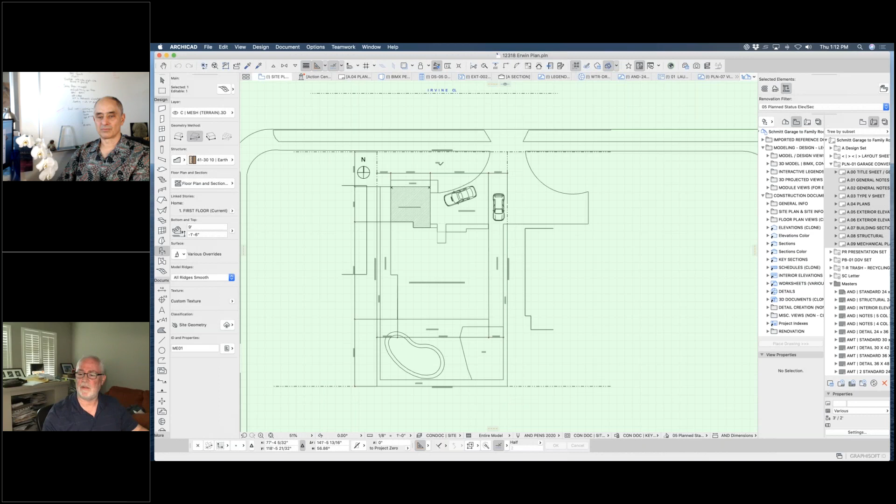So I break this down. I've got my construction documents, and this is really, I think, minorly changed from Eric's template. I've added a few more elevations and sections and things, but it just zips through real fast. I come in and do a quick demolition, and then I lay in the floor plan. While I'm doing all of this, it's creating the sheets.

So I've got a title sheet that has views in it. They're empty when I start. It has the place for the site plan. Obviously, depending on your site, this sheet may change. This particular one was small enough that, because I was going to be doing Title 24 calcs, I put in all the existing glazing. Again, that's just taken right off of the model.

I actually, for my maps, go straight to Google Maps. I find the address, do a screenshot, and drag it right into here. I also start with some worksheets, and every job starts with me dragging in either this particular one straight from ZIMAS, the LA City site, their plan, or I brought in the aerial view from Google Maps, which helped me lay things out. It's not that I then go back and measure to check things out as far as the site, but it's a great way to get ahead.

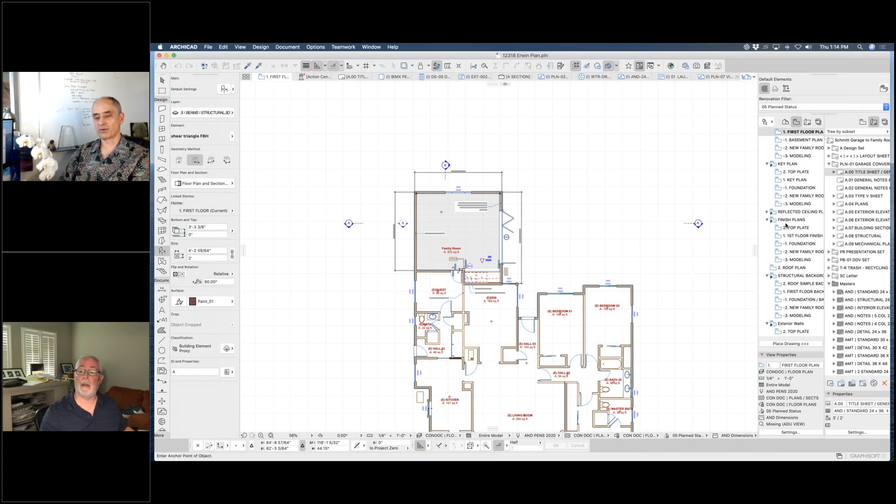Go ahead and bring up that 3D view. That would be nice, just to see it in the context that you... Let's go to model. I'll just pull any 3D view up and we'll just zip over there. That's inside.

So that is, if I zoom up, that's Google Maps. And this is stitched right onto a mesh and scaled in. And it was great. I did it after the fact, and I was pretty darn close with laying out the site.

This doesn't have to be a perfect model throughout because I'm literally just dealing with this space right here, right? So they care about, can they get their drums in there? Can they get their laundry in there? What's the lighting like? Things like that.

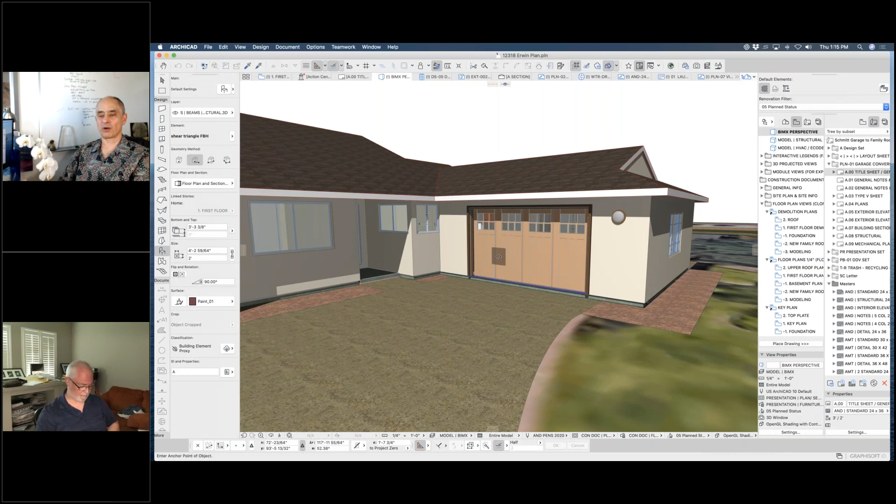Anything else you want to see on this, Eric, before I go back? We'll just take a real high aerial view because right now it doesn't communicate very well, but I imagine if you're taking a top-down view or a very high-angled view, it would sort of look like the building in context. Yeah, when you get all the way up, it does, especially if I got all the way over it.

There you go, we can have the street the right width. So the laser tape works. There's the context of the building within the neighbors. That makes sense? Yep, absolutely. So now it actually seems like it's usable.

Okay, yeah, do go on with the file structure. Now, you used to start with a little building off to the side and eyedrop things and copy and paste them. I know in MasterTemplate we have a somewhat different approach, but it's based on that. Are you using the MasterTemplate interactive legends, or use a template? Absolutely.

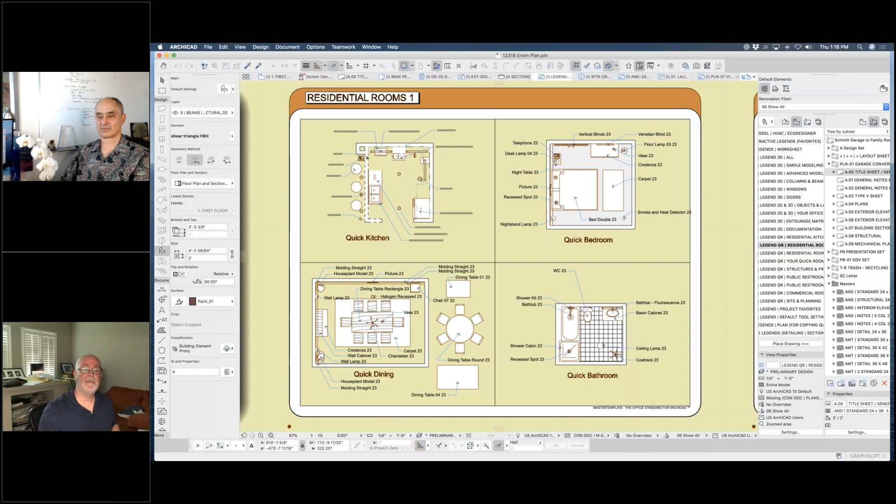So I use this a lot, and I live in this zone here, residential rooms. That's interesting, some of the stuff is missing. I do a lot of option-clicking off of these and dragging things in.

Instead of using that, I have some walls I use all the time, so I'll actually start putting a wall in and then pick the composite that I want. I get really specific with these because especially nowadays, we're really tightening up these buildings energy-wise. We're getting into these details with new assemblies, with the zip system or with exterior insulation, and the builders are having a nightmare right now.

They keep telling me, 'What is this? I've been doing this for 40 years. I've never had to do this.'

You showed me an interesting 3D cutaway when we were meeting just ahead of this session. That's in this project right here, the little ADU. Those cutaways, let me find my 3D views. There we go. So standard 3D views, I do things like having the front porch, or in this case, views that I used to show them.

I used to do renderings all the time. I show them these because this much is done in a day or two, and I don't even put them in sketch format. I don't want them thinking it's too easy.

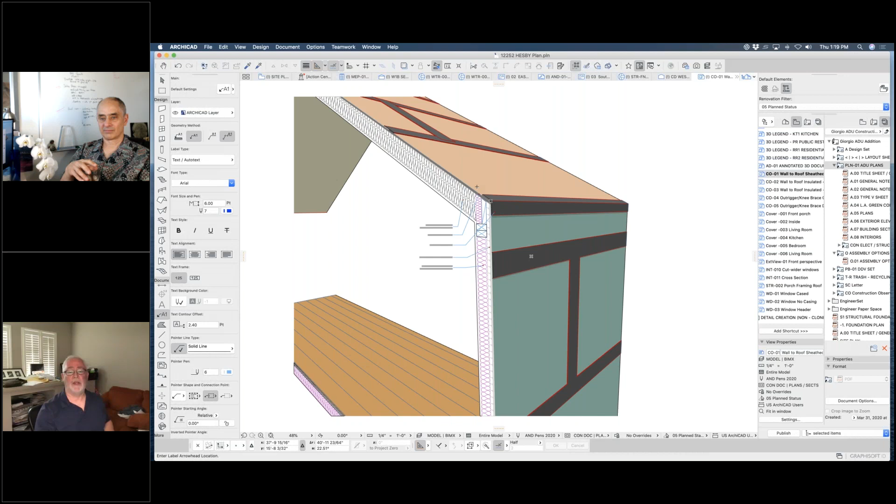So I created 3D details for him. This is the zip sheeting on the roof, the zip sheeting on the wall, which has the insulation as part of it. We showed the tape, and zeroed in so he could see how I want this to run all the way up through the blocking and keep the envelope sealed.

And then I stepped him through it. I then added wood for the rain screen. Then we added the roof and added on the eave as a boxed-in eave, so that the insulation went right through.

I will tell you this, he still came back to me and said, 'I need more information. I don't understand what that is.' We blew up the detail for an outrigger and how I wanted it built, all in 3D.

We're doing a lot of this now, and it's based upon the model. In this particular case, because I wanted to be able to blow it up and show different stages of it, I actually pulled a copy of the model to the side and worked over here on those.

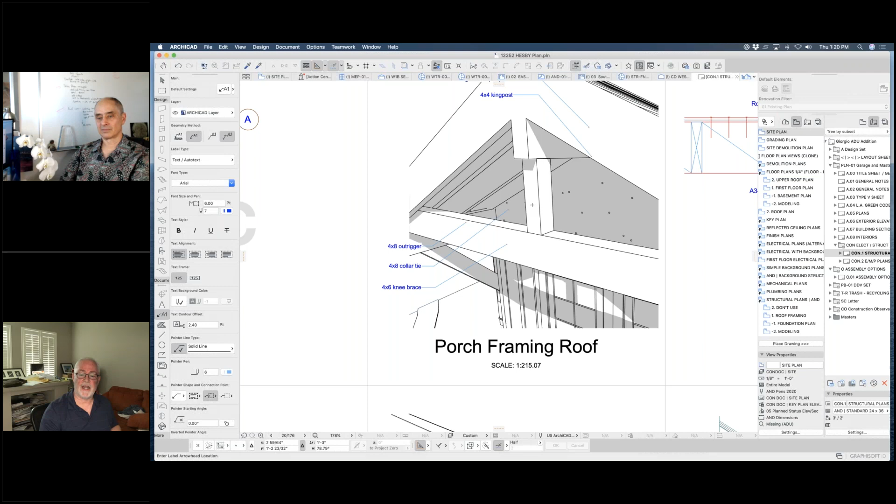That's how we're using 3D to get details across, and they are in the plans, in the structural set. So you have your regular plans with framing plan, foundation plan, details of eaves, shear transfer, and footings. And then I blow up details that I want him to understand in 3D because they just are not getting it in 2D, and that's fine.

It's a constant battle to learn what language you need to speak, depending on what builder you're working with or who the owner is. This one works for most people. He was still struggling with this, so I haven't figured this one out.

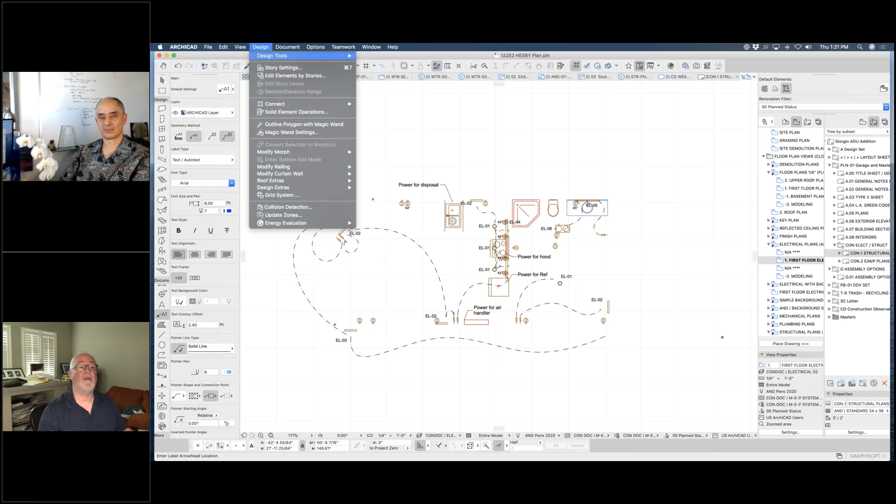I had not spent enough time on graphic overrides. And I finally figured—I know, the guy really knows this stuff real well—but I hadn't spent enough time on graphic overrides. I finally started realizing I had to change the way the walls looked, because I work with composites where you can see the whole assembly, so I changed it for these now.

So when you look at these over here, these are all actually two drawings, right? There's a background and then there's the mechanical laid over it, or the electrical laid over it. Let me stop just to explain for those people who might miss your quick explanation.

So graphic overrides are a way, introduced in ArchiCAD 21 I believe, to change the way things look. They override the graphics. So in this case, making the walls have just a single fill, a poché, a light shade, as opposed to all the detail that would be in the main floor plan and, of course, the sections, etc.

So that's one thing. Now you also used a feature here on the sheet - we're zoomed in on a layout sheet, and you've got two different drawings placed in that area. Sometimes that's useful. I'm not sure in this case whether you could have done it all in one drawing, but the point is, you had one drawing with a particular graphic override and another drawing isolated with different settings. So that is one way to do that.

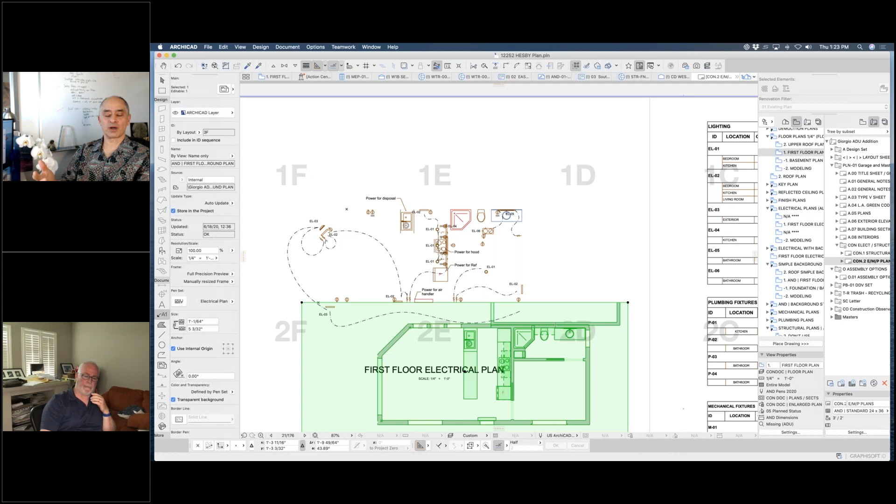Can you just select each of the drawings so we see, and I'll explain my thinking behind the fact that there's two of them. So this is the actual - if I move this - that's the electrical plan. And then this, which has no title on it, is the background. Hold on, there are two drawings there, but only one has a title. So from a printed perspective, it just appears to be one drawing, but there are actually two views, each placed and synchronized, just placed so that they match exactly where they should align.

Yes, and the reason I went to two - you could do this another way - is because I don't want to do anything more than once. So I've got my walls done the way I want them with the pens I want, which I've lightened up recently. All these layers that go to these walls - vapor protection, water protection, air protection, thermal protection, and structural protection - take up a lot of space in a composite and they're hard to read. So I've gone thinner, but it also means they're busier.

And this way I can take that exact drawing in a different view over here, and give it different graphic overrides as well as different document settings. So it's the exact same drawing - I'm not drawing anything twice, I just have a different view of it.

Okay, so that is something I might explore with you, Van, because sometimes it is required to have two different drawings, but other times you can use a graphic override and just select, for example, that you want to work on walls that are on particular layers. That's one particular override, and it doesn't affect anything else in the drawing. Sometimes you can combine these, but you've got an efficient system there - it's literally just placing two drawings on top of each other, setting one of them to not have a title, and using the view settings for each one.

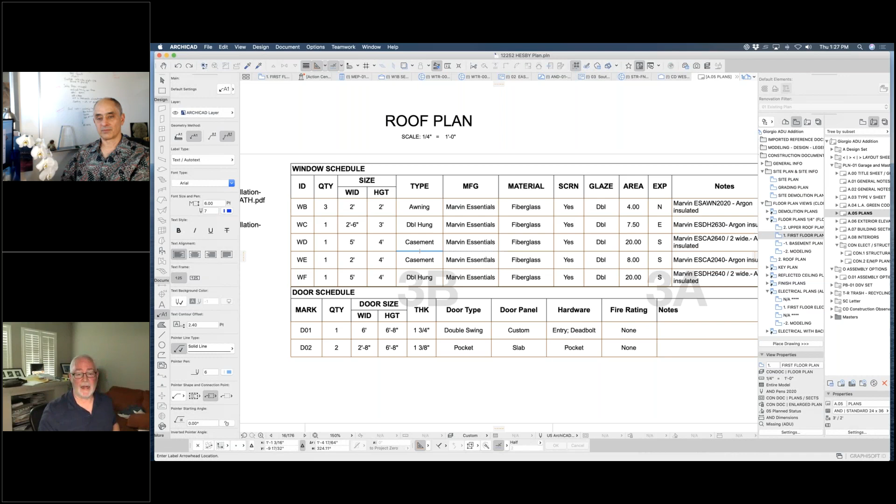So I did that for a few reasons, but everything is in one place now. So if I go here, I can go down to properties on this window, and I can go to schedules. I know that if I'm working in a larger office I would have to make this more automatic, but I can then go in and put in the information I need - there's where I have the exposure, the manufacturer, the glazing, everything is here.

And yeah, so just another clarification, since I like teaching while we do these interviews.

Graphisoft has provided for decades the ability to do schedules with data built into the library parts. In recent years, with the properties capability, you can now customize your own data fields to put into schedules. Using properties, you can reorganize the ones in that area Van was showing, add your own properties, and not worry at all about the library part definitions. So if you create your own custom window, you can easily have that same information go into the schedule. That's under the property manager.

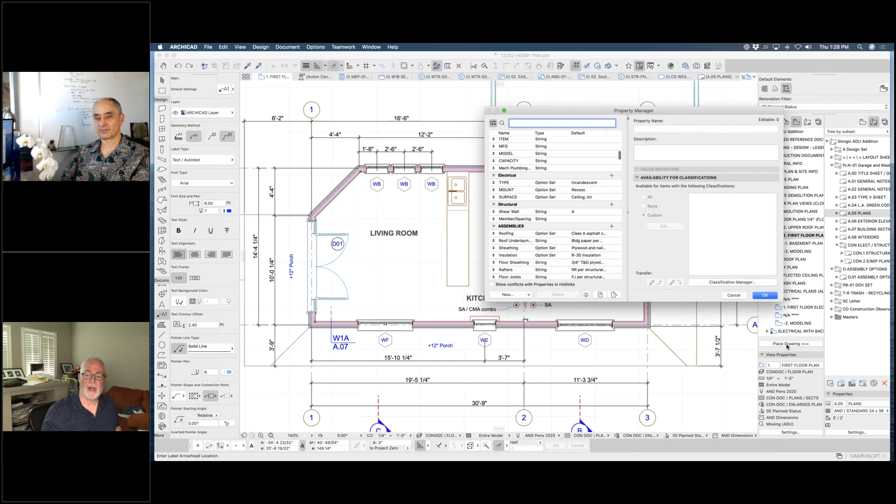Yes, right here's the property manager. That's exactly the biggest reason—I don't have to have a certain window or door or light fixture.

Brett thanked me for asking you to expand on that. So that's great, all right.

So let's carry on. When you start a project, typically you're doing remodels or additions these days, so you go and do a site survey. You said you were using a tool that brought back a DWG file to the office. Is this like an iPad tool that allows you to quickly get the basic data? iPad or iPhone—it's an app called Magic Plan. And it will communicate with certain distometers.

This is not the one that works with it. As you measure or put the measurement into the room, the newer versions with the newer iPad Pro, which has a LiDAR sensor, are much better at actually getting the dimensions right on their own. You get the corners of the room, say you're done, and it says tilt up to show the height of the room, then point to the windows and doors. It does all that remarkably accurately—accurate enough if I'm measuring an entire house but only working on two rooms of it. I'll still measure by hand everything I'm going to be touching, because they say if it's off by two inches, it does matter.

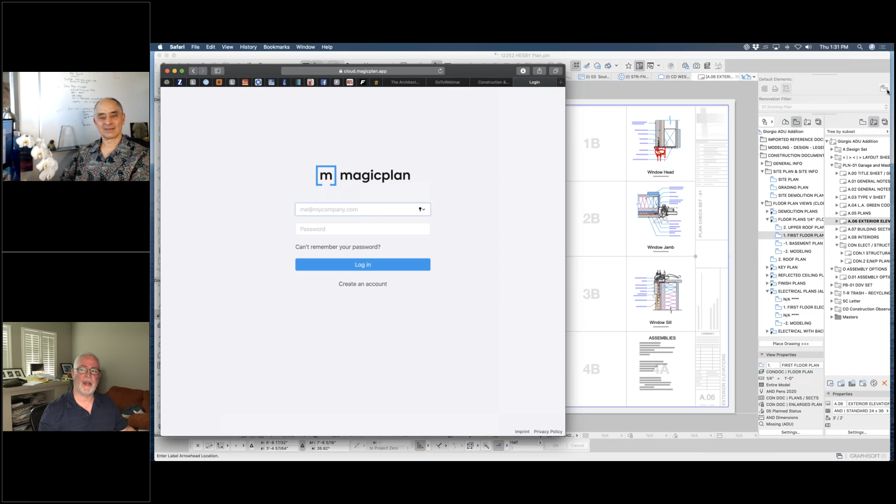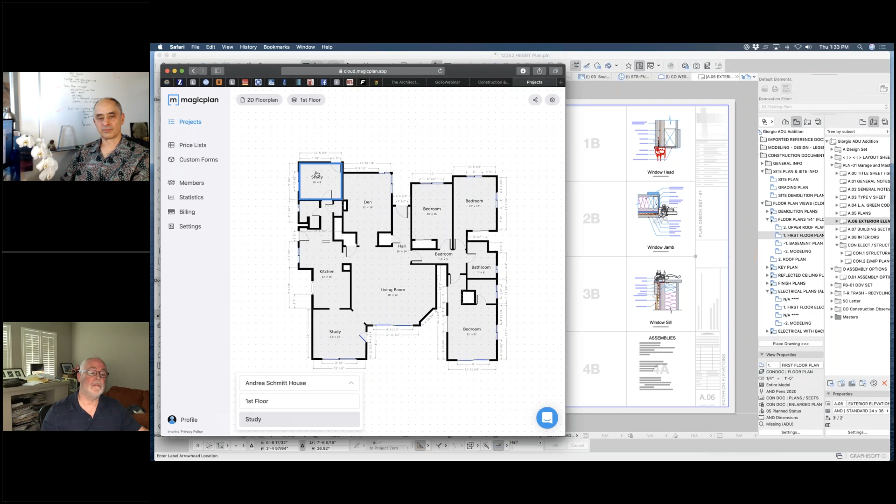So these are all individual rooms, right? And for any one of these, it should allow me — there it is. If I took any pictures of anything in that room, there it is, as well as any notes. So this document that came up, that's great.

Hang on. Internet's not being nice.

The plan that came up also comes to me as a DWG. So I pull that onto a worksheet and work right off of it. But it's actually a 3D model — you can look at this in 3D and spin it around. For some reason it's not happy, I don't know if my network is slowed down. Anyway, keep going. Okay, all right.

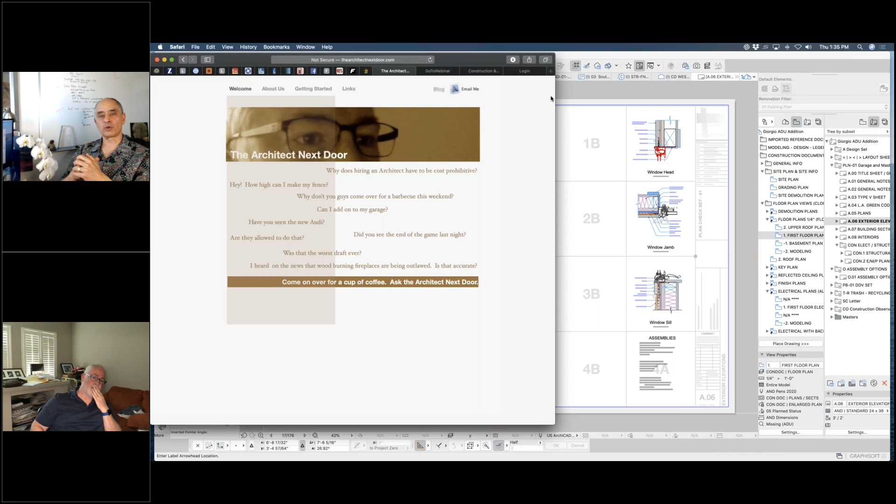Well, you showed us enough to whet my appetite and make me curious about it. So you bring that in, and then you use your kit of parts, nowadays MasterTemplate, to quickly build up a model. At what point do you start adding in all the detail, like the 3D cutaway you showed? Is that something you wait and only do in areas you need to, or are you working with composites and complex profiles pretty quickly?

I work in composites and complex profiles right away because it helps me see it as something real. There are times, like a plan I was working on for my own house, where I did a lot with just solid walls because I didn't want to start thinking about details like nailing, flashing, stucco, etc. I wanted to think about the abstract of the space, but I do work in those pretty quickly.

I also work in 3D right away — most of what I send to clients is either movies, 3D renderings, or 3D sketches, because none of them, and I mean none of them, really understand 3D from a 2D drawing.

Now you were mentioning sharing movies — do you have any samples? Movies don't tend to show up very smoothly on a webinar, but we do get glimpses of still shots along the way. No, I have still shots. The movies — that was why I signed up for the VR class, which I didn't have time to do.

Early movies were just too jumpy for me, so most of what I do is 3D views — either fully rendered or a lot of work with those 3D documents. You showed us the 3D documents, at least a few of them. Can you show us some of the views that are a bit more rendered up to this point?

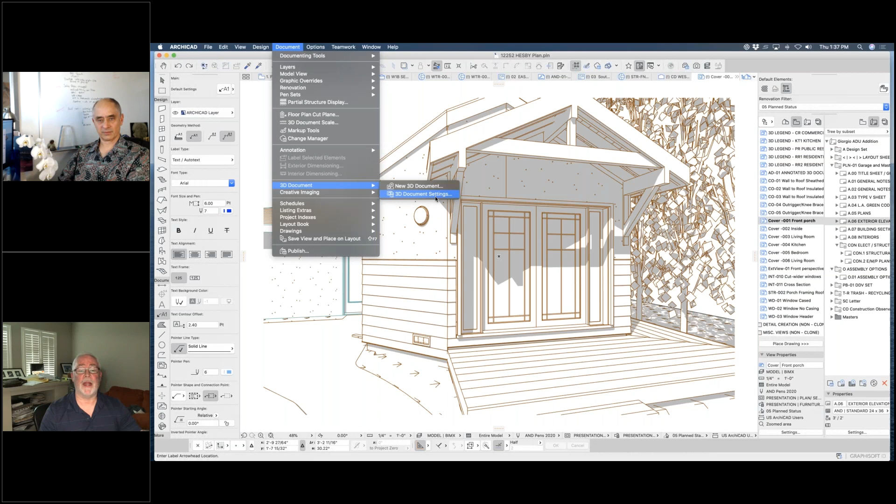What's interesting about these is they're all 3D views — that's why I like them. You can take any one of these and... where is it? In 3D, you know where it is. Are you talking about rendering it? No, I wouldn't go for rendering it. I could go to these and just change the settings, and I tend to do that, but usually I have more than one where you could just say, no, I want it to have its own color, its own surface, usually not shaded, and then boom, you've got color.

These tend to be so cartoonish, but the clients seem to like it — even though the stuff we've always wanted to do as architects is make it very photorealistic.

What happens, I find particularly in design, is that when I get too realistic, even with color, they start thinking about the finishes long before they should be. They'll look at siding and ask if it comes with a little more yellow in that brown, and I'm like, wait, let's not talk about that yet. So I stay away from a lot of the photorealistic stuff up front. I deal a lot with these types of views, or a quick photo.

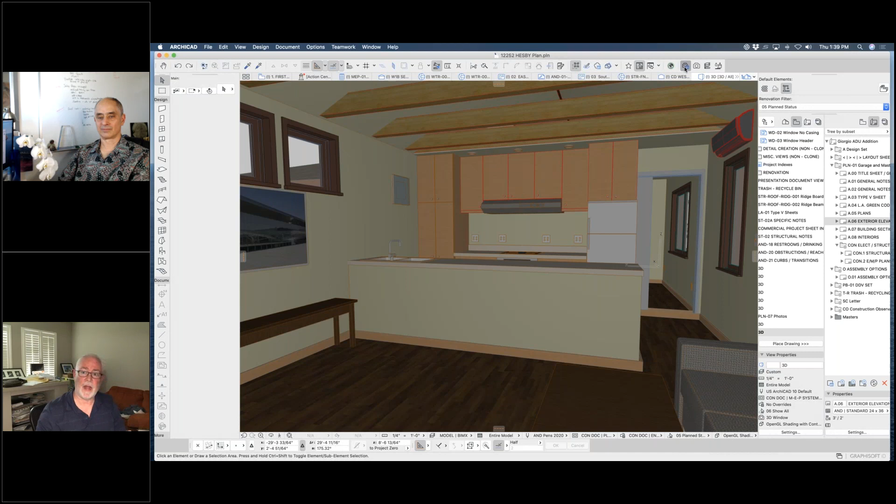The other thing I do quite a bit of is I will very quickly jump to the right settings, go to 3D. Oh, look, we lost a seat. Things go wrong, and now that I'm working on my own, not with a full office, I can very quickly fix something like that. And then you get a 3D view. The idea is this thing is well enough, accurately enough modeled, that I can literally show them anything I need to. Oh, I forgot to turn the lights on. But you get the idea of what I'm saying.

Now you said that you had these two small projects that were a little bit more developed in terms of the working drawings, but you had the other larger project that you were in process on, but would be more interesting architecturally.

Yeah, so that's this project. This is a house that we're doing in Studio City on a street called Valley Heart. It's definitely larger, it's a corner property, a large piece of property, a 2.5 size lot. So we did a lot of work laying it out and deciding where we wanted to look. Across the street is the river, and the whole lot is surrounded by trees.

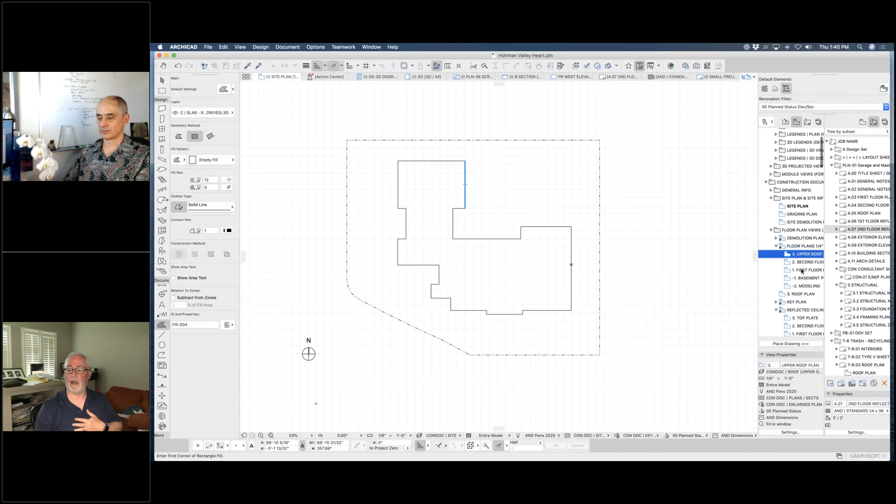So in working with my wife, and talking about it since we're not the client, we discussed how to break the house up. We kind of wanted a wing for the kids. I have two kids, one is 20 and one is 16, they're both musicians, and they're both very loud, which is wonderful. I love music, I love hearing it, unless I'm trying to think about what I'm doing right now. And we wanted our area to be separate.

We're not through design development almost, but you can see, I don't need to walk you through the whole house, but it's broken up. You enter on a corner, you have your public area, and it gets more private where my office will be. Then when you go upstairs, you have our area and the kids' area over here, with a break in the middle.

I'm playing with finishes and massing and volume right now, so I do a lot of this. There we go, let me get back outside. This is really how I do a lot of my design work. I start looking at something from down here, I move up and look around, and say, well, you know what, I really think this here should be this material. You know, no, I want to go back. I do a lot of that.

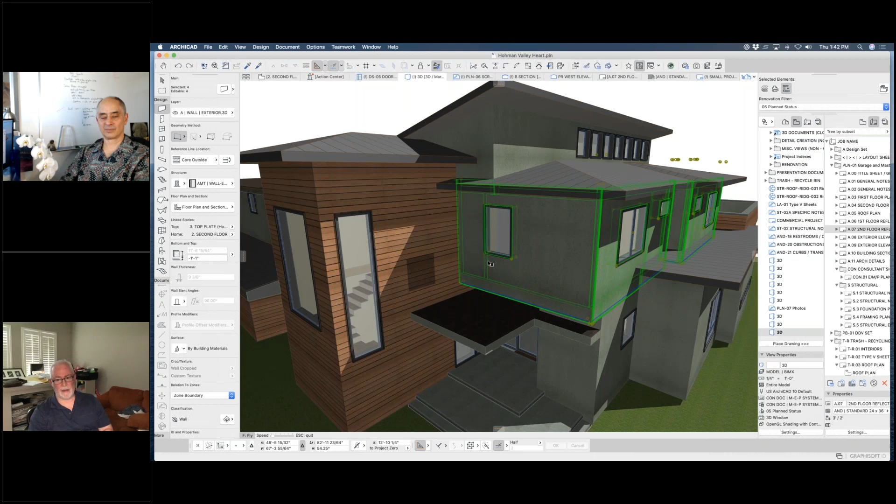I'm right now playing with this roof height because I want to bring light into a hallway. And believe it or not, this is design development. It looks like construction documents because I was trying to figure out dimensions.

But I do model this much as I go. I think about things like, when I cut a section, let me grab another section, hang on one second. And I've got my floor framing. I also want to look at the floor framing of a deck or a patio or a balcony or something, and I don't think I have one that shows that right now, I haven't worked on it. Let's see, there we go. So I'll work on laying them out on this, and I look at things.

Can you zoom in on the wall section that's sort of in the middle area? Yeah, here? Yeah, so I just want to see how far you've modeled up to this point, between one wall and the slab and the next.

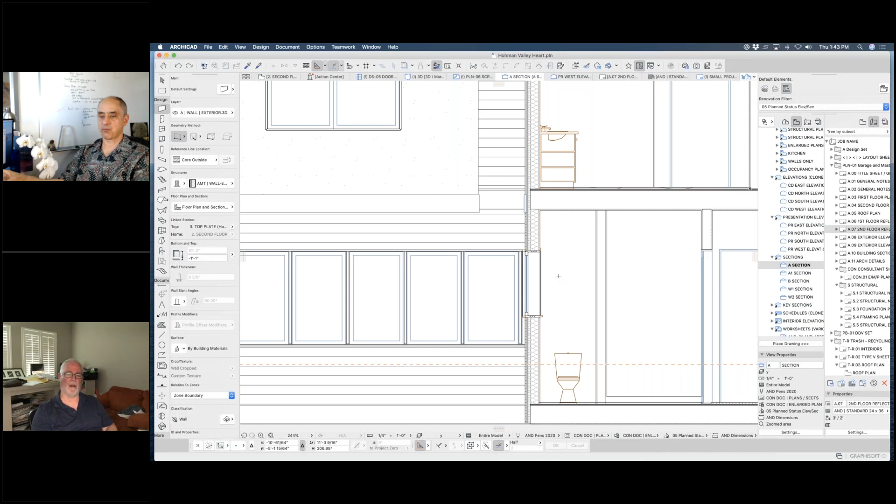So you don't have any framing, you're not doing complex profiles, but you are having all of the skins intersect. Yeah, this is part of me being a hybrid. All the skins are there, they're accurate. I tend to, particularly at this point, if I had to do a section and show it, I would quickly throw on the 2D bits from your template. So I throw in the double top plate, the sill plate.

I need to work on learning more about complex profiles that are stretchable and scalable in multiple directions, so that I could really have a good wall where I could slide headers up and down or double sill plates up and down. But this is the level of complexity right now.

If you zoom in on this, there's a difference in the walls. This is wood siding with a rain screen, then zip, then the 2x6, and then insulation.

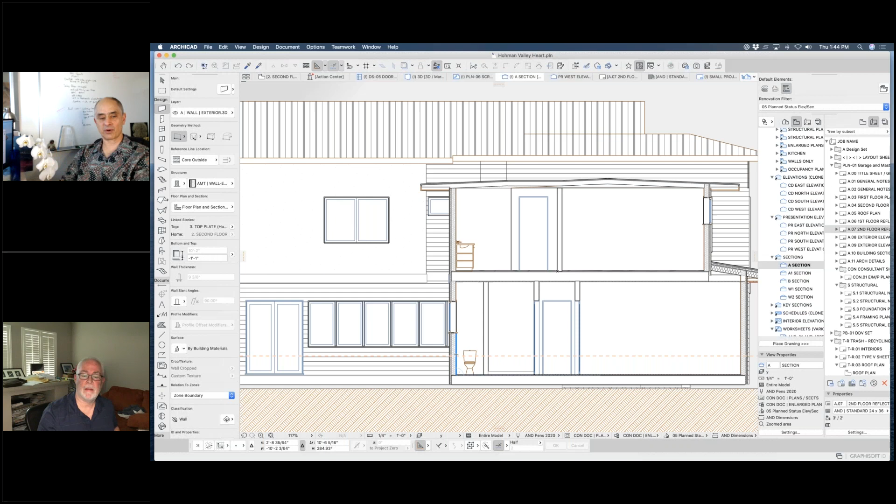Then up here it's stucco with a rain screen. And the floors right now, I'm actually laying in the flooring on top of the floors because it changes so much—again, that's from your template also. So you have a structural floor with the sheathing, and then on top of it tile or carpet or whatever, like that right there. That's a separate finished floor slab laid on top of the flooring.

So this is design development right now. But even at design development, this is the beauty of the system—the sheets are starting, right? The notes, everyone has their own notes, but the sheets are starting to fill out as I work, even getting into reflected ceiling with different graphic overrides.

Exterior elevations, right? Oh, this is interesting—just pause for a moment. So in order to really highlight the different planes, here you're putting a fill with a wash behind it.

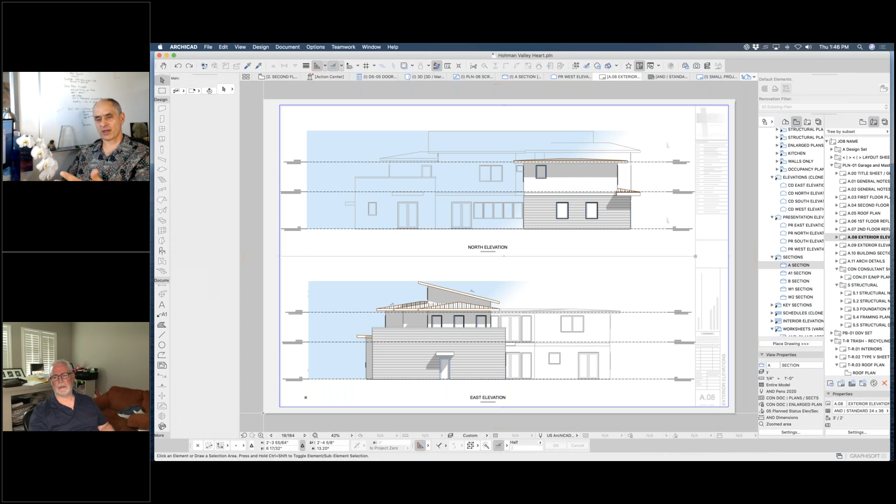Yeah, that's because it is one thing to just have certain vectorial hatching, like the upper one—either one, you've got the siding showing, and then the walls behind that. We don't know if there's no siding, or if you've hidden it because it's in the distance. But by putting the wash behind that... are you doing that in the view, or on the layout sheet?

It's in the view. Okay, can you open up that view and let's see. It's literally a fill. All of my elevations and sections fill up the width of the page basically, so that I have room to put everything in there. Then I can drag this over and change the color, do whatever you want. But it gives you the feeling of what the foreground is and what I want you to look at with the rest in the background.

For those watching who are wondering how he does that—in the fill tool, you can put a variety of different options to cover an area. One option is a radial fill, another is a linear shading, and you can set it to be one color in one place and change to another color elsewhere. That little vector line, when he moves it, shows how it changes from the highest density of color to pure white or no fill. That's a very interesting way to highlight what you want to show on a particular drawing, and it's on a layer you just turn on and off.

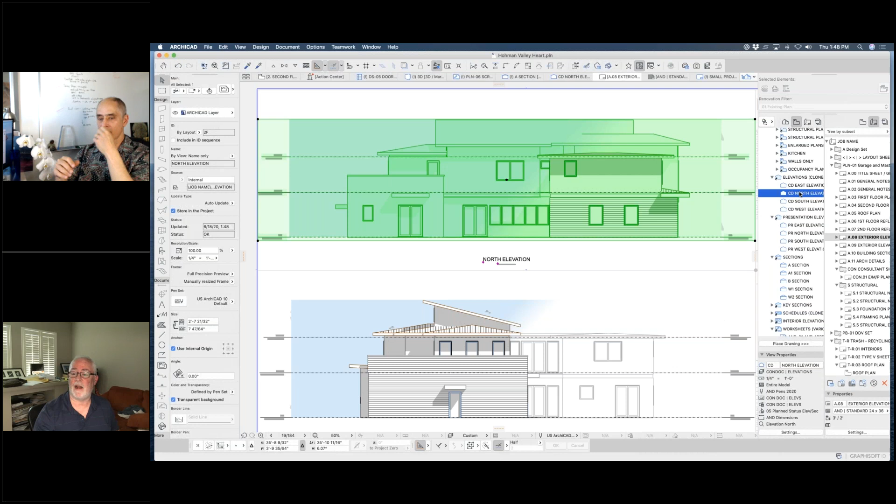They change. So let's take a look at that elevation. Here's the north elevation. I also present the elevations with color, right? They're the exact same marker, they just have different graphic overrides. Again, this lets the client start to get an idea—in this case, it was letting my wife start to get an idea for the different materials. The sky stays the same, but when I print it, the sky will go gray.

So that's this elevation here. I use the shadows also, and that helps us take this flat drawing and really punch it up so people see the depth. Okay, let's see if there are any questions or comments here.

So how do you output hard copy? That question is from Tom Markunis, from a few minutes ago. Do you print on large format plotters like has been traditional, or are you doing more small format things and digital?

I'm almost all digital, all PDFs. My print service, when I need drawings, whether to go over something with the client or for the city, what used to be blue printers just print them out for me quickly now. I'll also say I'm doing more BIMX models on the large iPad and sit with the client to walk through it, or I'll send them the BIMX file so they can walk through the house on their own and tap on plans to look at those. It's a lot of electronic and digital.

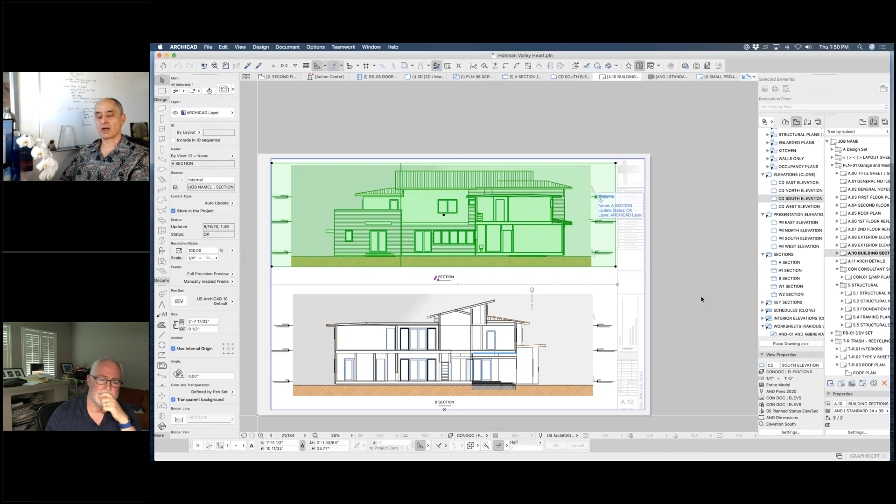So about the fill you put in, at first I thought it was cut out, at least in the ones with a more dramatic change, focusing the eye on one area. If you go back to one of the elevations, it looked like the blue was cut out around the foreground area, but actually I'm seeing now that you were doing it by changing the tonality in that area. So it's not precisely cut around, but you could have a fill that's literally cut. You can add more polygon points so the background is washed out but the other things come forward.

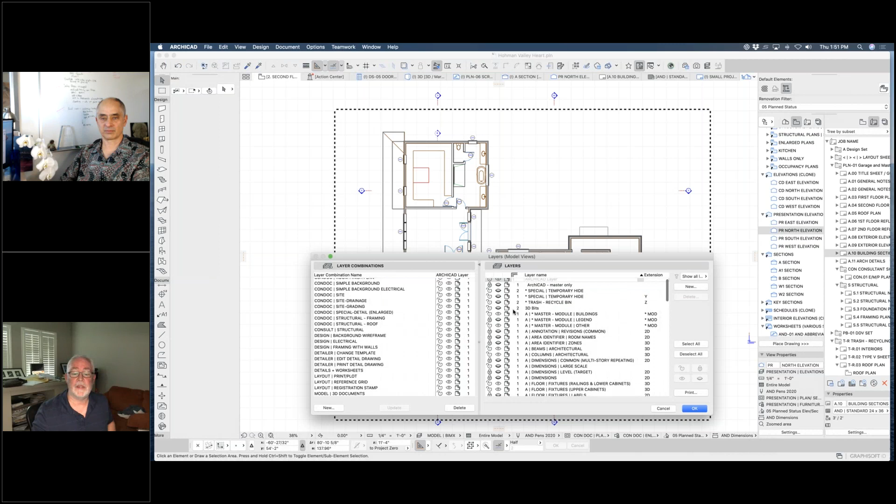There's another aspect to that too, I think, but let me check. When you go to the marker, let me turn the marker on—marker elevation—I'm prescribing where the mark distance is. So the question is, if I push that back further, will that change the appearance? It should, right? Should I explain mark distance?

Go ahead, I'll be interested in your perspective. On an elevation, when we drew by hand, things that were closer I profiled with fatter lines so they popped out, and you drew lighter lines as you went back. If you handed this to somebody without the shadows turned on, it's very hard to tell the depth of what you're looking at. You can tell this wall is in front of the green wall because it cuts off the door and steps out, but without these shadows it's very hard to tell.

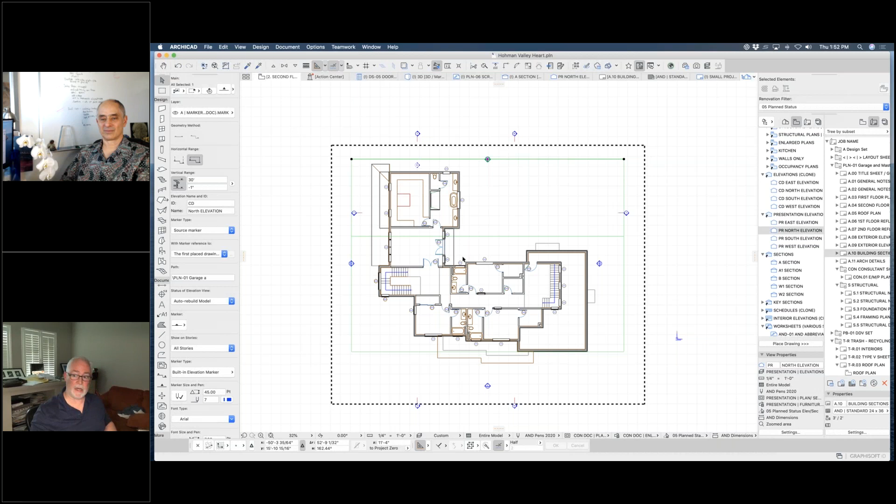So the mark depth—I'll go to the plan view to explain it. Here's my elevation marker, showing the entire building. This is the end of it. The mark depth lets me say anything beyond this point I can treat differently. I've pulled it back now, and that face that was brown should now be translucent or transparent. If I change that setting, I could fill all of that with white, and the blue would disappear behind it, or leave it transparent—that's the other trick.

So you can right click in empty space and choose elevation settings. By right clicking in the view and choosing elevation settings, we can see the setting on that marker, which might be the same for other markers, but the mark distant area is checked. Then there's the option that fills uncut surfaces in the distant area—filled with nothing, so that's translucent or transparent, showing that fill. The fill is literally behind everything.

But if I came in and filled it all with the screen, that should change it. Now that still gives you the mark distance—I can still tell that stuff is in the background and this part of the building is closer.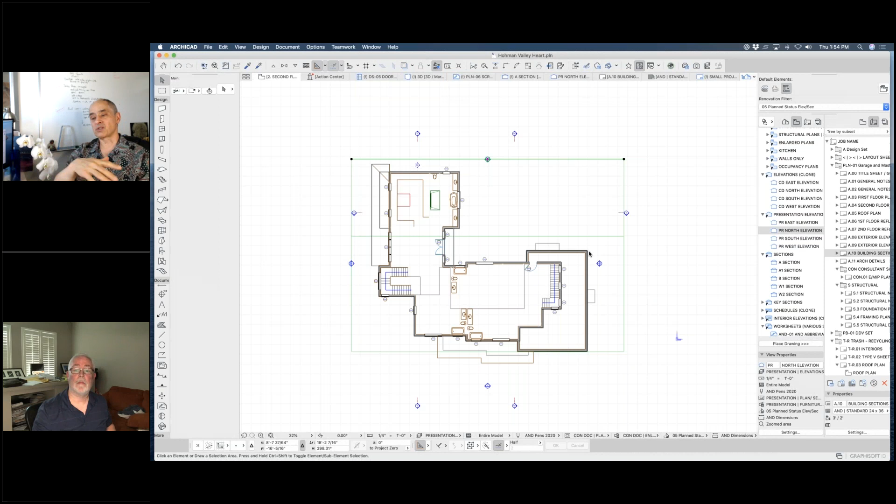Okay, yeah, that's excellent, and I think that clarifies it. So when you turn on mark distance with the checkbox, your marker on the plan gets an extra line you can adjust. If it's not turned on, that intermediate line isn't visible. The one limitation is it's just a straight line—you can't zigzag around things, so it's a little limited there. But actually, did they change it? Ah, okay, so that's something in recent versions they did change—you can zigzag it if that helps clarity.

Now, by the way, Steve Cribble makes a point that the gradient fill you used, which is great, requires using the fill tool. Can you just highlight the fill tool for a second on the side?

So when you select the fill tool, you have to deselect whatever's selected. There you go, in the fill pattern to the left of empty fill.

Press down there, so there are 4 choices for fills. The first one is graphic fill, meaning it's purely graphic, do whatever you want. The second one is a cover fill. The third one is a cut fill. And the fourth one is a building material.

These change what options are available, and the gradient fills that we were just looking at are only available in the graphic fill because they're purely graphic. They don't represent real materials.

So here they are right here. And what he's saying is that if we go over here to this, they shouldn't be there, right? Yeah, they're gone. Gradient fills are gone. Thank you for pointing that out.

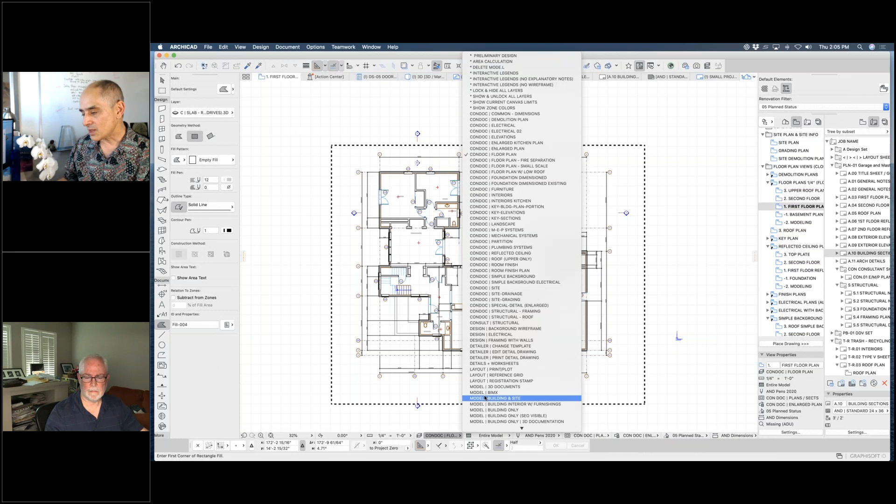Nathan asked if you could do something for the boxes really quickly. I'm not quite sure, but I think that was related to the fill.

Mark Wren asked, is the fill tied to the elevation marker? The fill is inside the elevation view, it's just drawn in there, not on the sheet. The ability to see through the background is based on the marked distance setting being turned on, with the option for making distant elements just line work and nothing opaque, which is what Van was using.

Nathan asked, do you always work with true line weight off? No, I go back and forth. In fact, right now it isn't on.

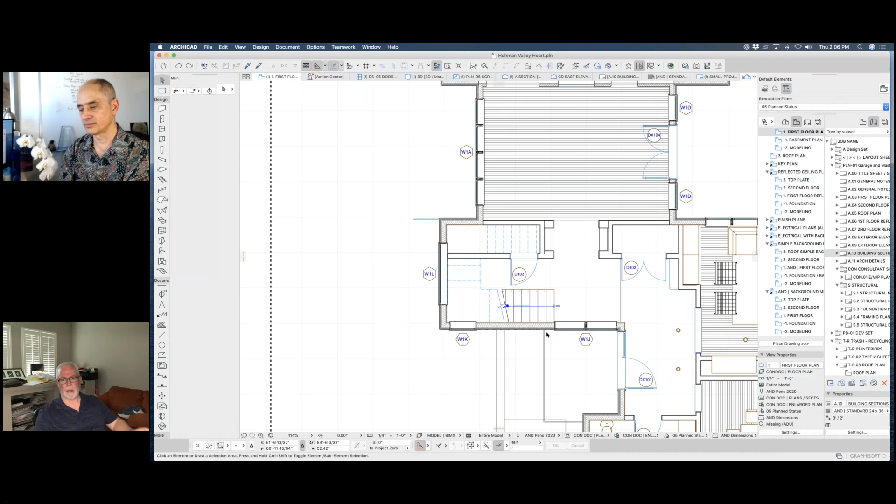At this level, this is where I talked about my pens being lighter now. I've made them thinner, with an even lighter pen on the inside than the outside. Sometimes, particularly when working on details or getting in close on sections and elevations, having true line weight on makes it hard to see exactly where the points are to line up. I know they snap, but it's still hard to see, and my old man eyes need a little help, so I turn off the line weight.

Renee, I think Palavan asked, is limited distance view available for interior elevations? I don't think so.

Interior elevations are simpler, obviously, and you generally don't have distant things that are too separated distance-wise. If you needed that, you could just use a section marker and create your own interior elevation using the other tool. It wouldn't be grouped as the interior elevations of one room, but you can get the graphics that way.

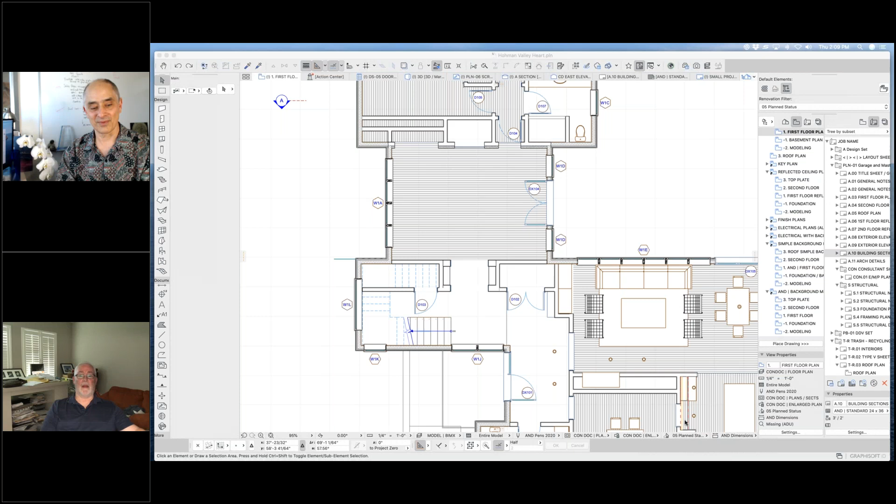It was necessity. All it took was my business partner once saying, this is not the plan I'm working on, why does it look like this? Okay, let me figure that out.

Now Scott, I'm sure you remember when we were first creating it, setting up all of those views and the layouts. Oh, who could forget that? Yeah, fun times. No, first of all, thanks Van for presenting.

Everything looks so nice and crisp and accurate, which I'm sure the guys in the field appreciate. But like Eric, what you're saying is that ArchiCAD shipped, they suggested how it could be used, but it wasn't really properly set up. And then you had the wherewithal or the knowledge to make it a real deal. So it was great to work together, and I learned a lot from you, and I think we did something that everybody could use. And I'm so happy that you guys are taking it farther now.

Yeah, it's become a passion project as I keep tweaking it and trying to make it do as much as you can.

So I wanted to mention one thing. I don't know if you do this or if anybody does this, but I found that managing text in the model view was a problem. So the only text I would have in a model view would be like a window marker or a linked label. I reserved all my text to the layout sheets, because it was easier to have a ceiling plan or floor plan without worrying about where the text was or what layer it was on.

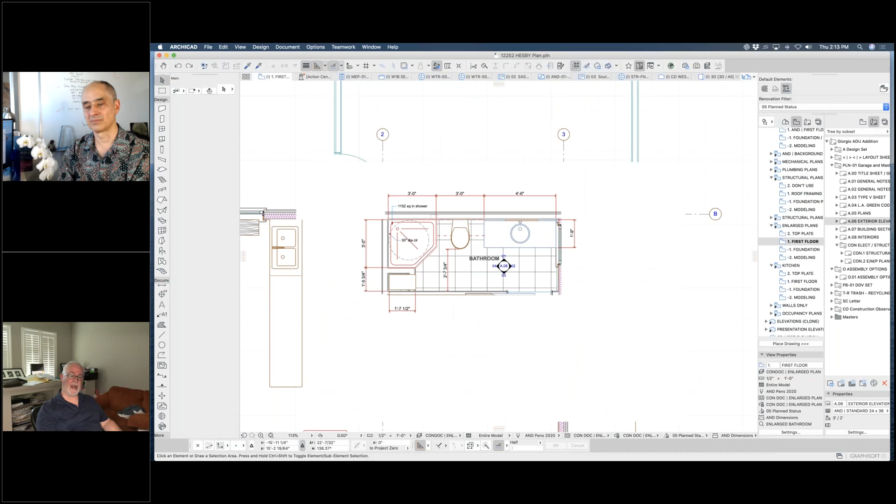I will say that controlling the views is everything. You'll notice on this plan, I don't have text or dimensions for the bathroom or the kitchen, which is crazy, right, because they don't know how to build it unless you go to the kitchen view. Now I can start to put dimensions in. You see what it really is - it's a blown up view with a white mask over the rest, or what I call the large view, the bathroom view.

This is literally the model, but I have a layer for what I call the bathroom view of this. Now I can add my 60-inch diameter circle, add my dimensions, add my interior elevation marker, and it travels there. But the exact same view for the model doesn't have any of that on it. So I kind of go both ways on that.

I try not to add stuff to the layout, because I might still move things around the layouts, drag them to different locations. With details, a detail is a drawing, is a drawing, is a drawing, but I may move stuff around, and then I have to remember to move the text with it.

That's correct. Yeah, and again, the brain isn't as sharp as it used to be - if I have to remember to move text, I'm in trouble. But there is some wisdom to it, because this model is the model, as you said.

So you mentioned something that triggered something for me. Eric, I added some layers that I use all the time that you guys might find useful. We do a lot of commercial projects too, so I added a layer just for accessible, ADA stuff, and then the circle as an example. Also for travel distance in commercial buildings, you have to show the distance to get out, so that's a layer I control with a unique travel distance layer.

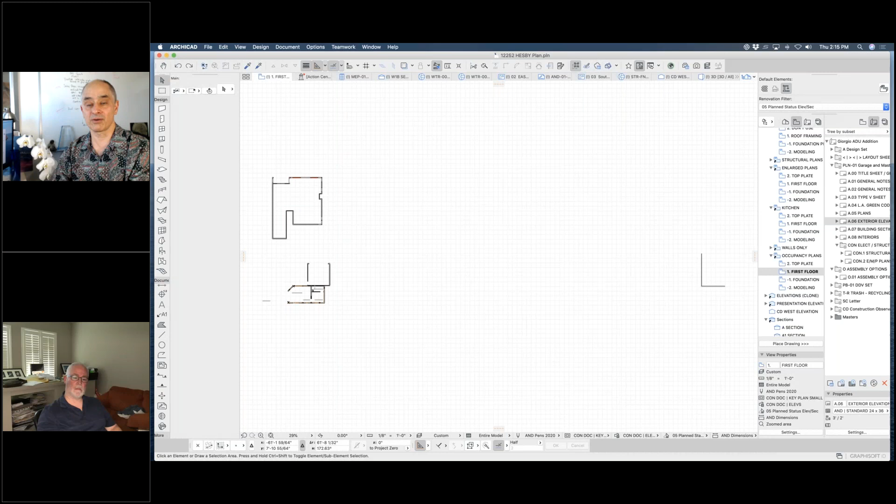If you have to show travel distance, you're going to show the walls, doors and other structural elements, and then have a certain set of annotation specifically for that. In MasterTemplate we have a layer group with the letter U as a prefix for unique, so we basically have a layer uniquely for that particular drawing. The system you set up, Scott, back then is easy to extend when you need two or three additional drawings or styles.

You just create a new layer combination, and if necessary, create a new unique layer that shows on that. Is that essentially what you've done?

Correct. On an exiting plan, we'll most certainly have the zones on, set to show the occupants in the room, which you can set. So it's an exiting plan that would have the occupants in the room and then the travel distance layer on. That's a model view option you can manipulate to display the number of occupants and so on.

Well, maybe I'll add this into the next master template. Maybe Scott, you and I can have an hour chat and see some of the enhancements you've done, because we definitely want to keep handling more and more different aspects of architectural practice like that.

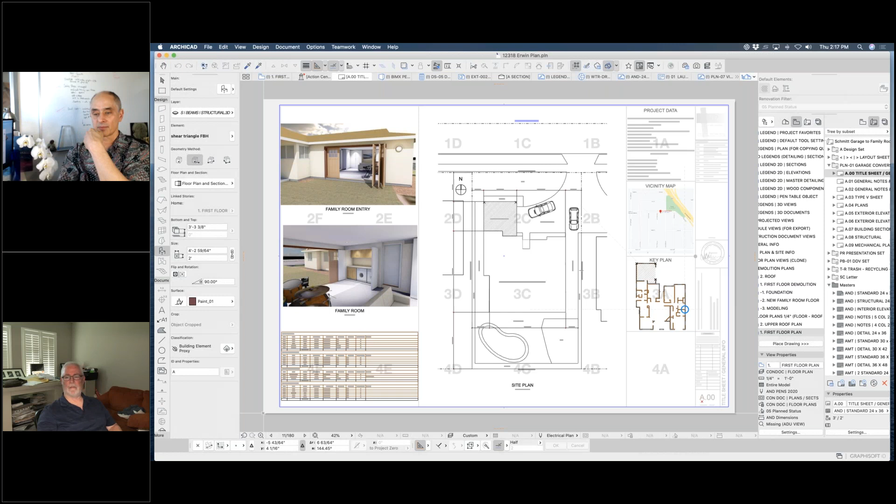So we have some other questions. Actually, you did ask a question about issue management, so we want to bring that up. When you go through the different phases of the project, you want to talk about how you do your issue management? Like your first set, the design set, and then you make changes and reissue the set. Can we look at your title block and see how you display that?

That doesn't have any issue changes on it down here. Okay, yeah. I'm really old school, so it's different in schematic design, to design development, to interiors, to construction documents.

What I do for those is I have a single PLN file called whatever the client's name .pln. When I'm done with my schematic design, I duplicate that file, take the new one and call it schematic, set it aside, and keep working on the old one. So I have archived schematic design, design development, and condocs, after plan check, for every project as separate PLN files.

Yeah, so I can't mess them up, because if I can, I will. Especially as you said, you want to move quickly, and that's why you do stuff in layouts. So I do that.

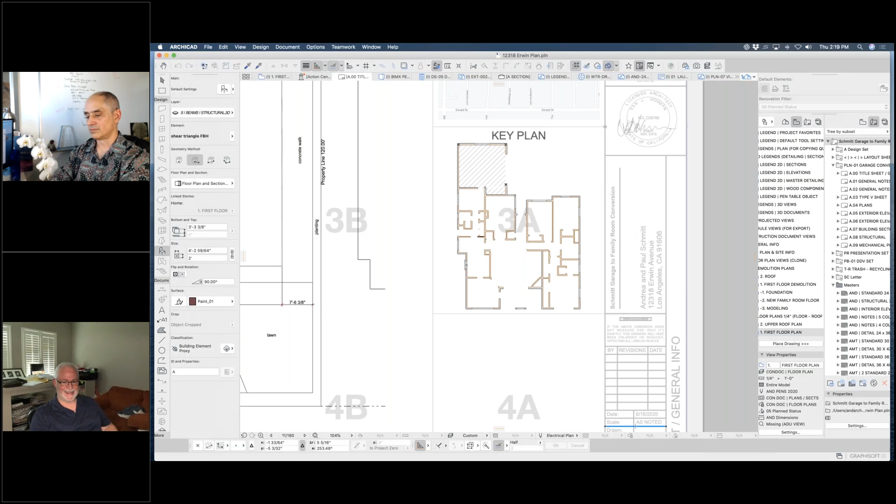How about you? Well, my partner makes a lot of changes, and then there's people bidding or whatever, and unless we highlight from issued set to issued set, we need to highlight the changes and then document it in the corner.

That's how we do it. But I like your idea. The thing we don't do well is that you'll work on a set of plans, and when major changes are made, I'll just add the date to the file name and start working on the next file. I like the way you approach it, where when you're done with schematic, you title that schematic right away in the file name.

Yeah, I think if we go to any one of these, they may not even be schematic, they may have dates. I have a permit one, I have a date on this one here, but the real one is the one that says .pln. Right, yeah, and it's always that.

I do the same with my library. I have my own personal library parts, and when a new ArchiCAD comes in, I duplicate it and save the duplicate with version 22 for ArchiCAD 22, and the new one isn't called 23, it's just called library parts for Architect Next Door.

And it never changes, it's always that name. When I get a new one, I save the old one, so it's always the same name. I always felt the more you change the name with save as, the more you could corrupt it, and it takes longer to find files. I really like the naming convention that you're describing.

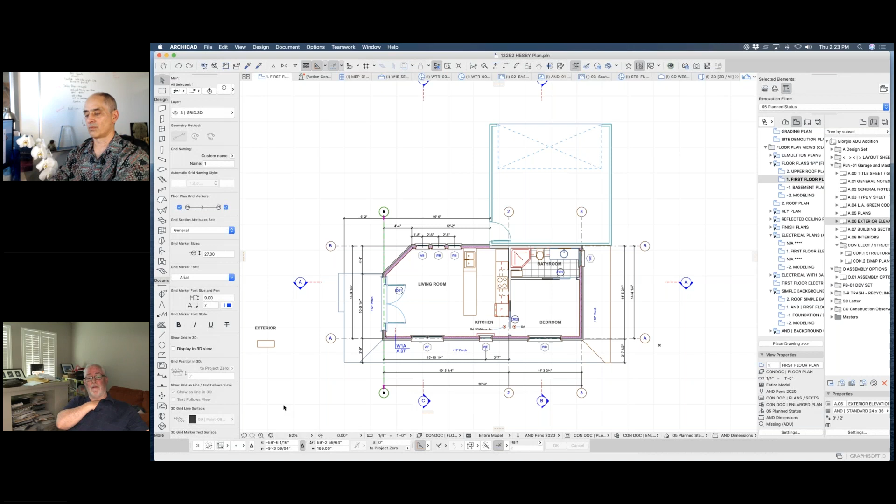Does that make sense? It makes sense. You just have to have a hard copy or PDF somewhere to show what revision 1, revision 2, revision 3 looked like, because some builder is going to say, I didn't see revision 1. That makes sense. Anyway, that's all I have to say on that topic.

There are a few questions about that enlarged bathroom plan. Can you go back to that? I'll explain briefly the essence there. People are asking, why don't you just use a different layer combination? Well, you are using a different layer combination. That layer combination includes things like the 30-inch diameter clearance, and anything else specific to this enlarged view that's not shown on the main plan.

And the white fill, can you just select that so we can see what it is and where it extends? I use it to block out what's behind it, so it just makes a clean background for that particular drawing. If you think about it, the drawing is part of a larger context, and you could show it with everything bleeding off, but sometimes it's good to have it all covered up so you're cleanly cutting off the edges.

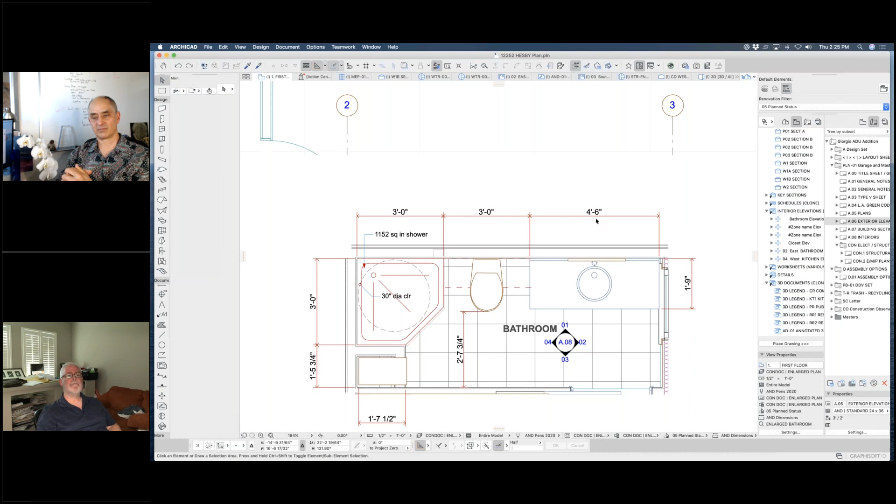That's a great idea. I remember we used to do that for interior elevations as well. Yes, we did, and that's what I was going to say. This comes from the fact that we really like our interior elevations to be really clean. They're just a rectangle and we don't see anything around that. I could show more but it would be in the way, and that's what I try to do on the enlarged plans too.

Let's see here, saving PDFs with date and title. Yeah, that's a good suggestion.

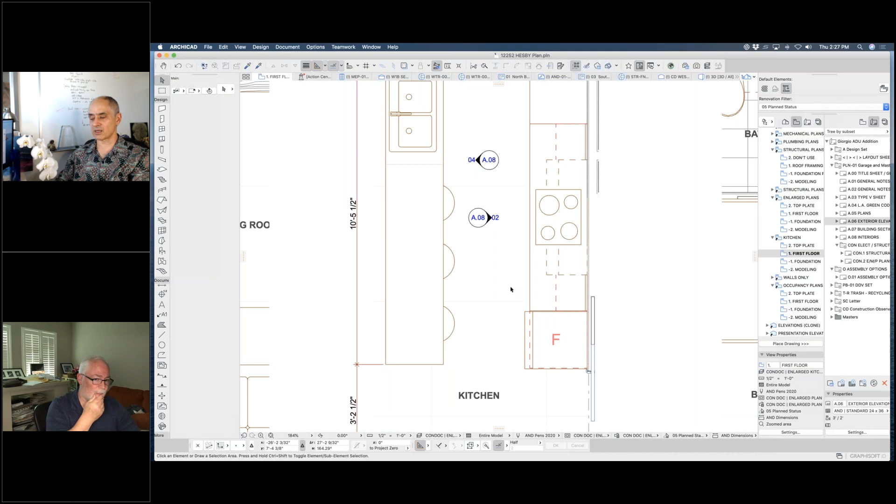So we're at about 90 minutes. We have another half an hour if we have things to show. I imagine there's some things you haven't shown us, Van. Tell us what else there is that maybe you had expected we would get to.

It's not so much about what to show, it's about why you show it. My business partner, when we first got ArchiCAD, would get mad at me for spending so long modeling a piece of wall to get it right. Then we'd cut a section, a wall section, do a cutaway, and we didn't have to do anything - it was just all there. He said, 'it took you an hour and a half, but you got 6 drawings from that one thing.' So the dance for me with ArchiCAD is how much to model and how much not to.

And it's not just about the graphics, not just about what this thing looks like, but how useful it's going to be for me to model. That's an interesting thing.

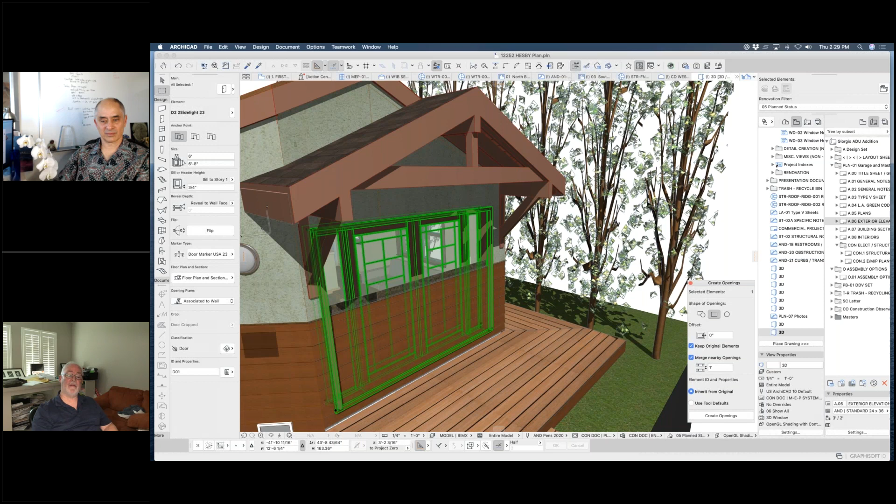Have you ever seen it lose openings, Eric? Is that siding a separate wall? I do create openings - well, before I went to this version there was an opening in that, I'll have to work that out. You're using the new opening tool for that - yep, so I can grab all the windows. Instead of doing a composite wall that has the siding, I can add the siding to my stucco wall, and in some cases that may go up 2.5 floors or 1.5 floor.

It's a beam that goes down forever, and I just cut it at the bottom. In this case, it's actually cut with a 3D flashing - this is a question about how much do you model. Is the wood siding like a wall, would you say that's separate? It's a beam.

You're using the beam tool in this case. So is it on a separate layer? It's on a 3D layer, I can turn it off. Well, no, it might be the intersection value that's wrong. Well, it was right 2 hours ago when I looked at it, so something I did deleted it. You know what, it might have turned off - the view might have turned off the... let's see if that's the case. Document.

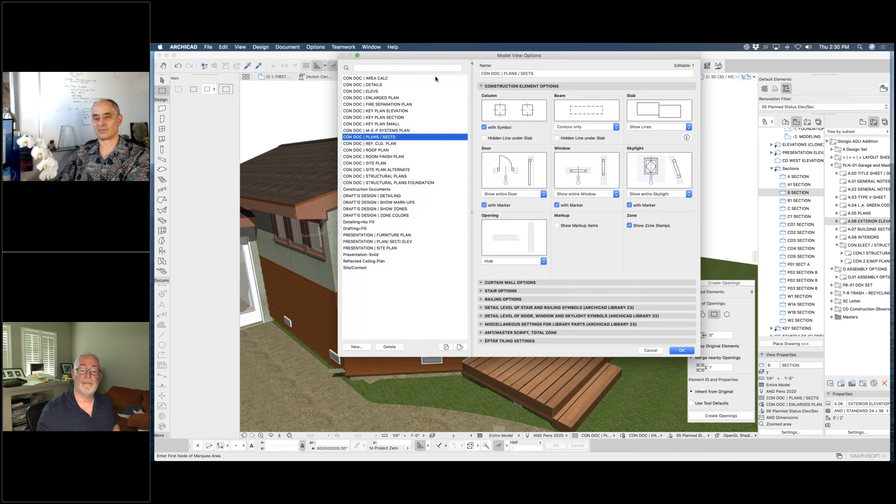Model views - one of the things that's been added is openings. All right, there you go - the opening was just hidden. Brilliant.

So, if you look down at the bottom of this thing, there's actually flashing at the bottom. This beam is probably 15 feet tall. Let me see, section A - and it's so that I can use it on multiple projects, I just drag it in.

There's a piece of flashing down here at the bottom that holds it in place. This one has actually been modified - I did change it. I'll sometimes have these be over long; I set the top and they run down the bottom, and I just cut them with solid element operations. In this case I redid this because I wanted to show it just like Hardie board for the sections, since the builder didn't understand it. I think I need a new builder.

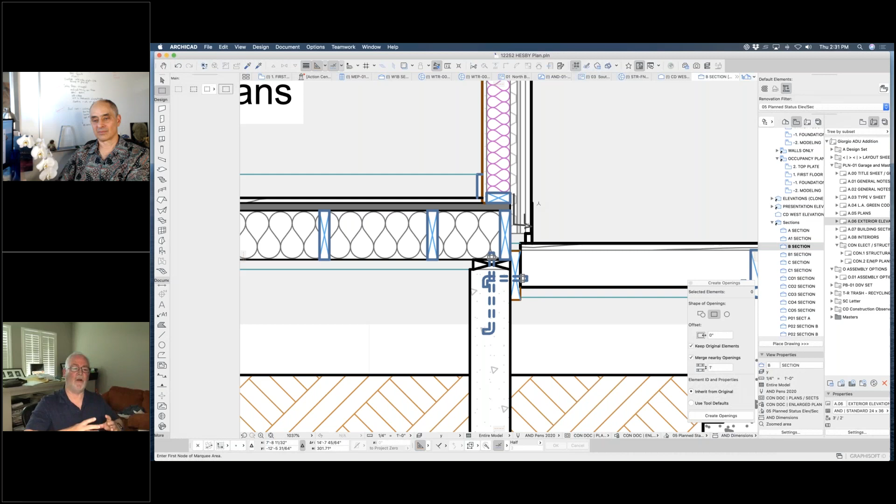But in the modeling, I have actual beams so when you do the blown up view and cut through it in the detail, it's already there. So you're choosing the beam tool for this siding rather than the wall tool - is that any particular preference, just simpler to manage? I just try not to put too many walls together because you run into problems with intersections at corners, where a piece of one wall underneath shoots through, and it takes too much time to fix. With beams, I don't run into that.

This green piece that's highlighted, is that a complex profile or a composite? Let's see - it's a complex profile of a weep screed and a step flash.

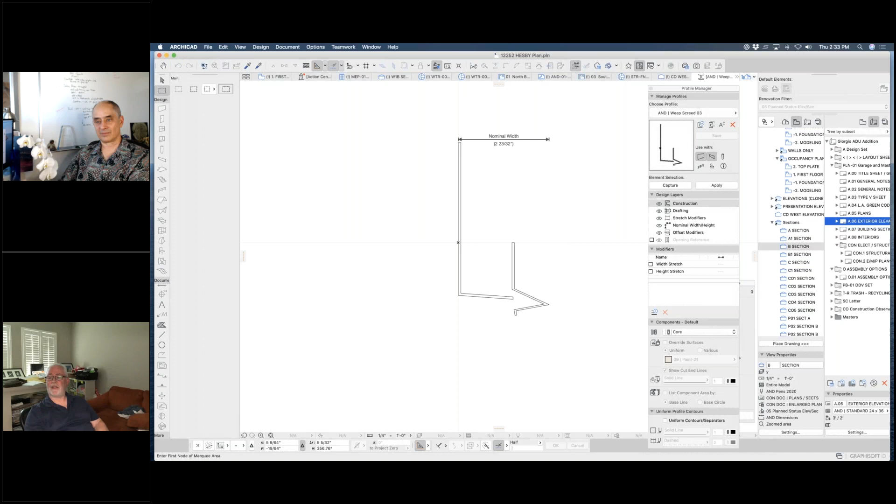Can you turn off true line weight and just go to hairline? Here we go. Okay, so now they're fills and they're so close together they come out as a thick line, which is what I want in the drawing anyway. So when you go to, for example, let me go to the sections - I have a blown up section.

I know, Eric, I should have told him to not rebuild every time automatically.

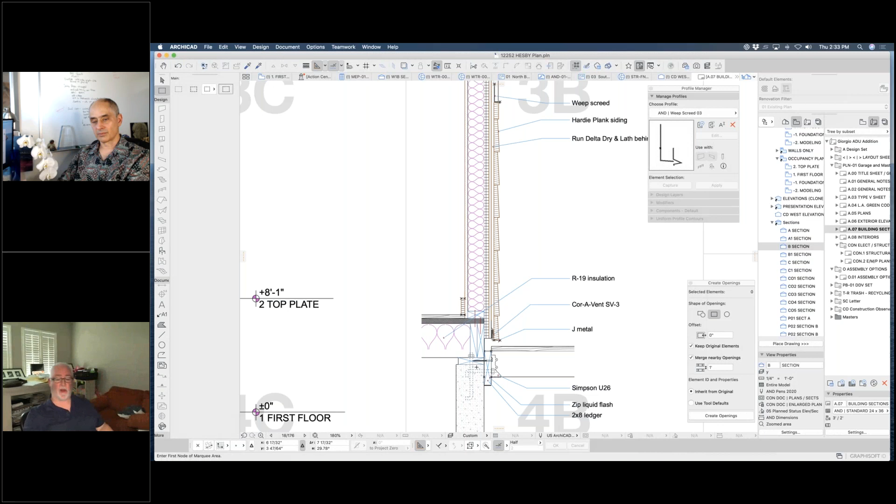When you go to these and zoom in, this is drawn in, this little flashing. But down here, this is not drawn in. This is a complex profile, or profile manager piece, that I put in there along with that piece of flashing, with that piece of siding, so I don't forget about the waterproofing when I do the detail. It's there. Can you select it? I was looking away. You'll just select that piece right here. Right, okay. What about the actual siding? Is that a profile? Yeah, it's a profile.

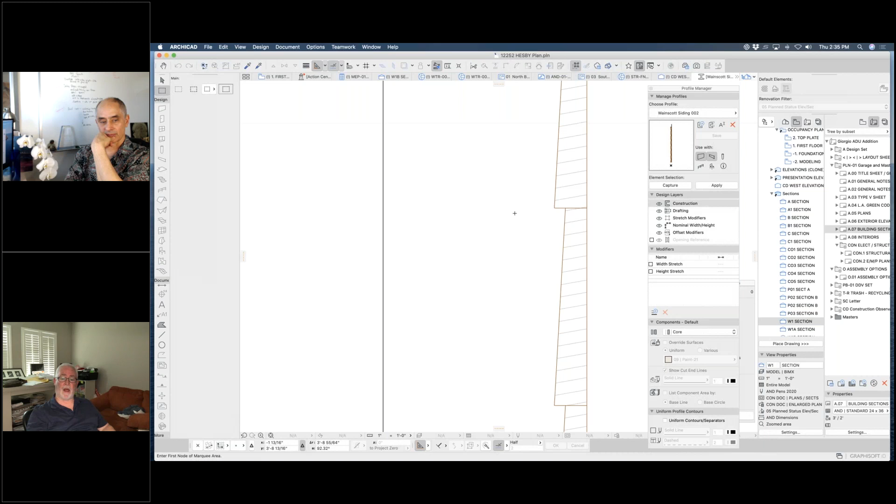So if I open this up, it's got a flash at the top, which alignment is off, and then it's got a top piece of the siding, which is based upon Hardie's actual pieces. This is one of their sidings. I could have it actually pulled away from the wall, but when you simplify it and make the back flat, it renders a lot faster and doesn't slow down the project. But this particular one also has flashing at the bottom, so they show up in my blown up sections, either my wall sections or my details.

So, as a note, if you were to have a different height, you would just create a different profile with a different number of repetitions of the boards. Well, if it's the same board, what I would really do if I want to change the material or have a different height is do a different one, on a different layer, and copy and paste.

You can also, if you choose not to have a flash at the bottom, make this thing too long and then use solid element operations to cut the bottom. So I can make this twenty feet tall, and then cut the bottom either with the floor it's hitting or the flashing it's hitting.

There's a question from Michael Rabachev asking, if you do structural and framing plans, how do you show walls above and below in the same saved model view, or do you combine above and below walls in the layouts? I don't show both. I'm old school on that, and in fact I get confused when people try to show them both. Let me show you.

I show the floor below. You'll have to click don't save on that. Yeah, there you go. Oh great. Well, alright, sorry, I think you put it back anyway. You put it back there. So actually it's easier if I just stick on the plan, instead of coming here.

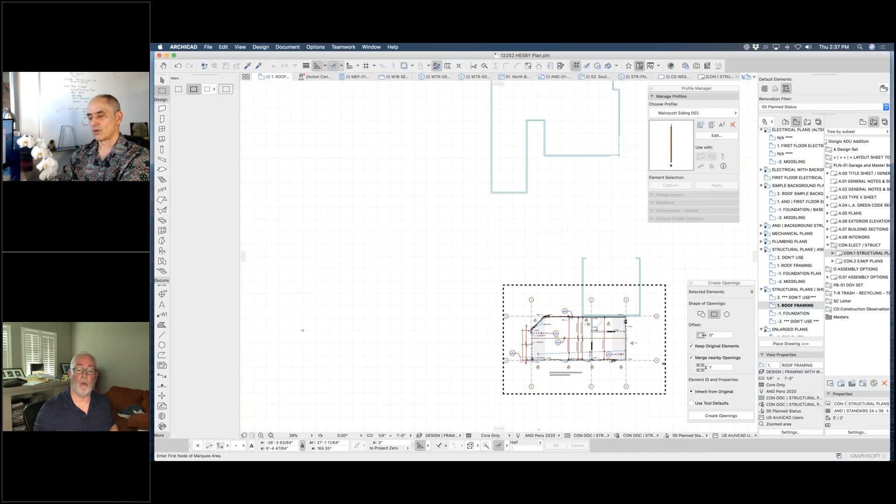So this shows both of them. I work with just the floor that the framing is sitting on. I do have a layer combination when I'm creating these structural plans showing background, so I can have the background walls, the walls of this floor, showing. Remember the openings? The openings are back and they're going crazy.

But this shows the floor below, and I show it because I want to show my columns and hold downs on this floor. When I'm drawing and working on it, I may, and do, use trace reference of the roof above, so I know, okay, if I wanted to show a rafter tail, it goes to here, or when I'm putting in my ridge, I know it's right here because that's where it is. So I use the floor above as a reference while I'm working, but I draw on the floor below. Does that answer the question?

We'll see, I'll see if Michael has a comment on that. There was someone else who asked a question about structural. Ricardo Lopez Sanchez asks, how is your workflow with Structural Designer? So I guess I'll talk a little bit about my work with my engineer.

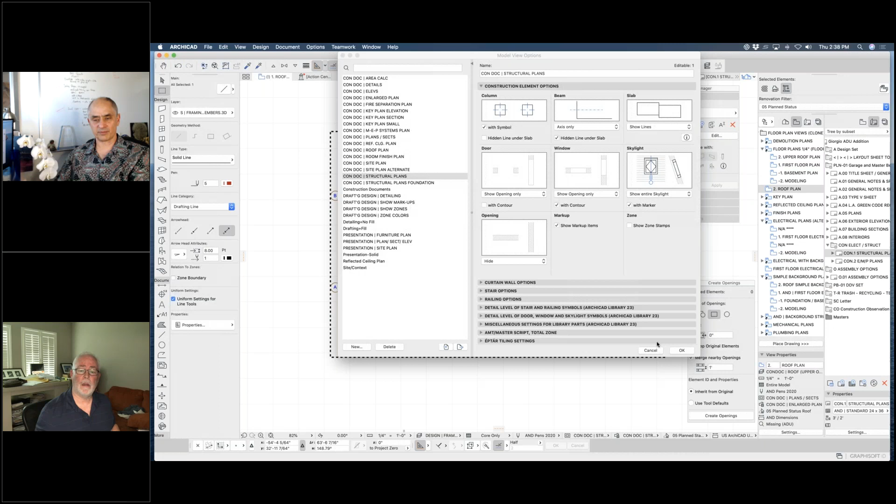I typically do all the structural drawings. So I will send to the engineer a PDF set, including a schematic framing plan that'll have headers, rafters, beams, ridge boards, girders, whatever there is called out, even my typical details that I use. I'll send them PDFs, and I will send them DWGs of that also. They'll typically use those to check my structure sizes.

He may send me some DWGs of details, but I typically want to draw them myself because no one sees the picture in 3D in their head the same way I do since I've created it. I've been working with the same engineer for a long time, a very smart guy, way smarter than I am, but he'll still try to put a beam through a space where there's a vaulted ceiling and not see it. So I tend to try to control that, but I send him DWGs and PDFs.

He will mark them up and send them back to me. I have yet to work with someone who uses ArchiCAD as an engineer.

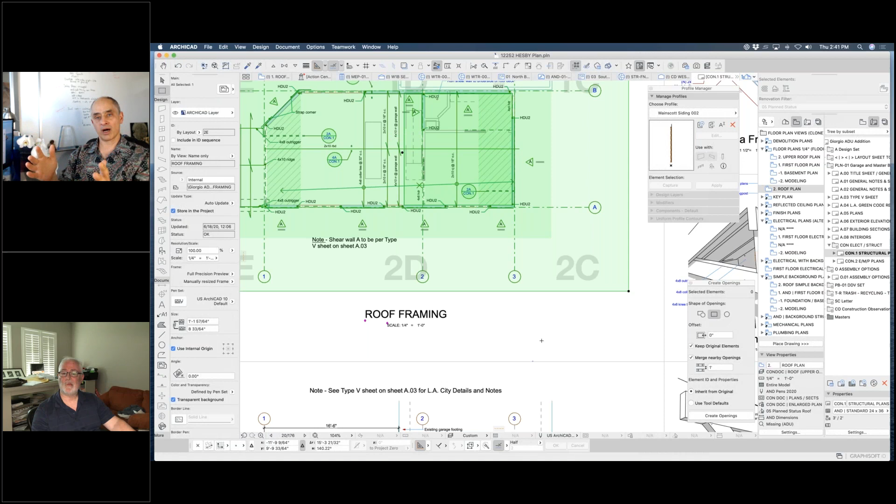Steve Petita asks, is there a way to show the trace reference on a view in a layout so it prints in light gray? There's no automatic way to just say, this view with certain active elements and another story as a trace can be placed over there. But whatever you're using as a trace can be saved as a separate view and placed on the layout in the same position, so you have two drawings overlaid, and you can change the graphic appearance so it uses a very light gray pen set. It's similar to what Van did with the electrical plan, except you could do anything - have the roof above, or another story as a trace - by overlaying two drawings and changing the pen set of one.

If I can add to that, unless I misunderstood the question - I can trace reference something on a layout, I just don't know if it'll stay. So I could say I want to see the trace reference of my roof plan, which should be here somewhere. There it is, and then I can drag that over. You'd have to register it basically. I'm just throwing it on, not going to make it perfect. You can trace reference a view on a layout sheet, I just don't know if it stays.

For reference, if you go to the trace and reference controls - the little drop-down menu where it says choose reference - we have to turn it on. You can see where it says roof plan there. It'll remember the last number used for this particular layout, so you can return to bring up something you previously did.

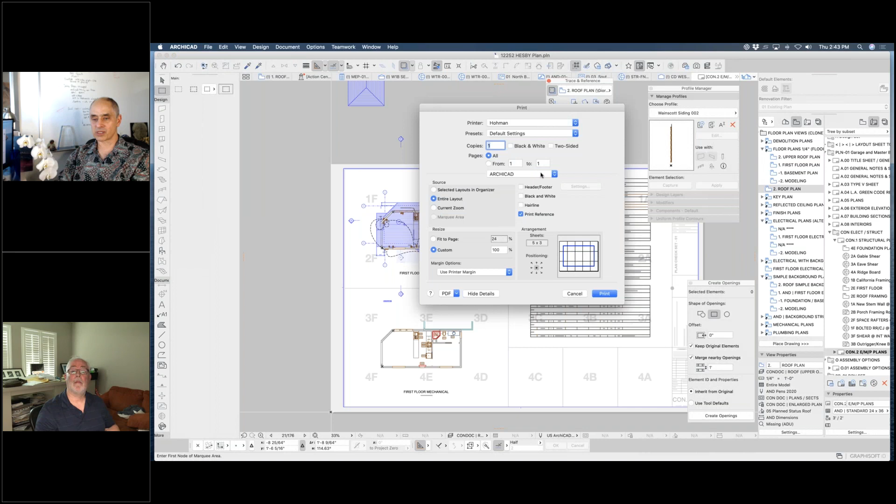When you're outputting, if you go to the file menu and do the print command - even though we won't actually print, and I believe it's also available in plot - under print you'll see an option that says print reference, a little checkbox. So that's a way to print to PDF or a printer with a reference. But it's not really part of the layout - it's just a reference on the layout, and it doesn't come from the original view directly. So it's something you can use, but use selectively.

I certainly tried it when I first noticed it. I placed my electrical plan on the layout and said I want to see the view of the walls as a trace reference. It showed up and looked great. Next time I came back, it had moved.

So I stick to registering the two together. That's certainly slightly more effort, but almost no more effort and much more reliable, which is to place two drawings: one of what would be the reference without a title, so you're not calling it out as a separate drawing, but with a different pen set. So that would be the way I would recommend doing it.

David Uguchi asks, what advantage do you see by doing your own structural drawings rather than just letting those be generated by the engineer? Seems like a lot of extra work and liability. Well, the engineer stamps them, I don't. So no liability.

If you're doing homes, and again, I've got a different kind of mind, I grew up swinging a hammer. But if you're doing a home, there's nothing too complicated in it that I don't understand. And again, I want control over that. I don't have to redline his drawings - he redlines mine. I go in and say, this is my intention. I want this to be vaulted, I want this not to be, I want to use 4x6s here because of this. You can't put a big beam here because I've got ducting running through. Whatever the reason is, I'm in control of that, and he has to tell me otherwise.

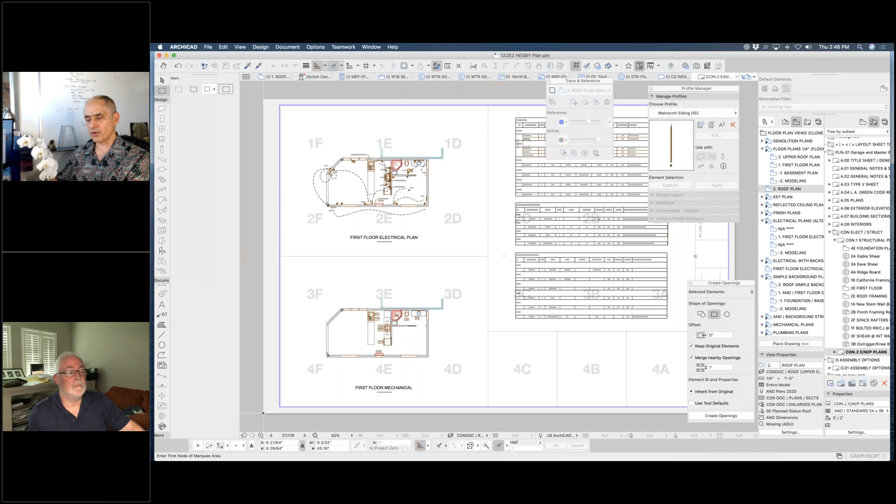Okay, so in relationship to showing the different stories, structural engineers always show both above and below walls. Otherwise columns from above are not shown on final drawings. So that's an interesting point - to make sure you're showing what you need to for structural support. Well, again, that's our responsibility.

So if you start at the roof with your ridge beam and go down, and when you start the next floor, whatever columns you had, you view those from below as you're working on them. So I'm drawing on the floor plan of the first floor for my roof framing, but I see what's above. You're going to trace that all the way down - by the time you're done, you will have done that.

I had a plan checker go nuts with me at City of LA saying I can't read these plans because the engineer had both the upper floor and the lower floor overlaid - he couldn't follow them. So that's really the reason I separate them. They're easier to read, but you do have to trace your loads down from the top down to the foundation.

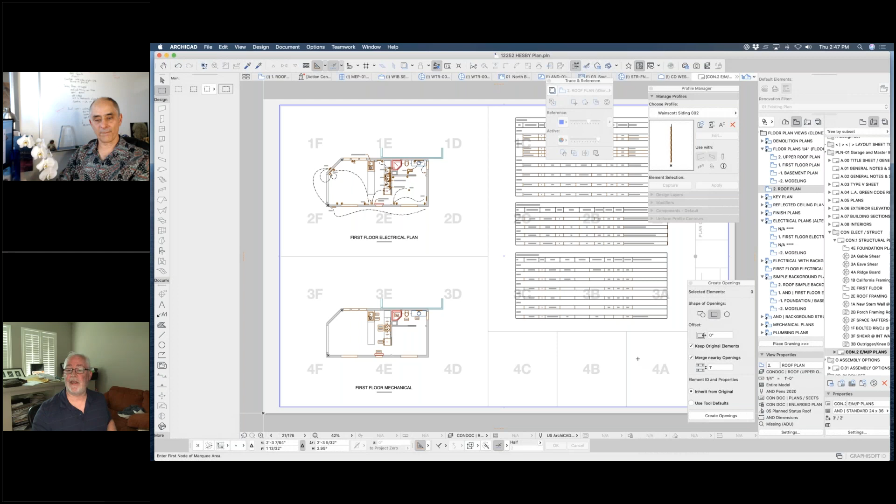So anything else that you think would be interesting to take a look at? Well, let's see, we did the 3D view thing. Hang on a second, let me jump over to...

This guy - the other thing I want to encourage is different sets for different size jobs. Right now, everything I'm doing is single family, and most of them aren't as big - they're not a 5,000 square foot house. Most of them are a 1,000 square foot addition, a 750 square foot remodel, a second floor, but they're houses, so they're going to fit.

But if you look at the plans for this little house, and you go to the little ADU, and go to the floor plan sheet, I've got room to have some waterproofing details and a floor plan and a reflected ceiling plan and a roof plan and schedules. Whereas on something as large as a 5,000 square foot house, my plan sheet has room for barely a plan.

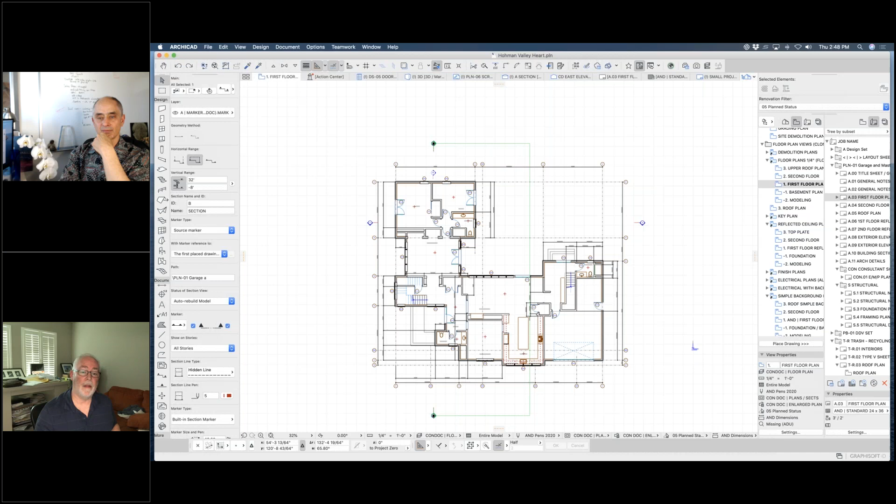And you'll even see this section marker - if you jump out to the floor plan view, there's the real section marker. This is just a screenshot of the section marker that allows me to, because I work in 24 by 36, I would not be able to fit that whole thing in here.

My old business partner had a propensity for cluttering up a sheet - he loved to clutter up a sheet. And it used to drive me crazy, because the more cluttered up it got, the less people could understand it in the field. So simplicity is what I'm after with these.

So having different sets for your different types of jobs is really kind of important. If it's the same floor plan, it just needs a different size sheet or a different setup. So on this one, I have to start developing my architectural details and pulling them on, because I can't put them with my roof plan or my floor plan.

So start thinking about that and have different sets for that. This particular template I'm using just has the one because I use it only for houses. But it's important because you can spend a lot of time playing with these.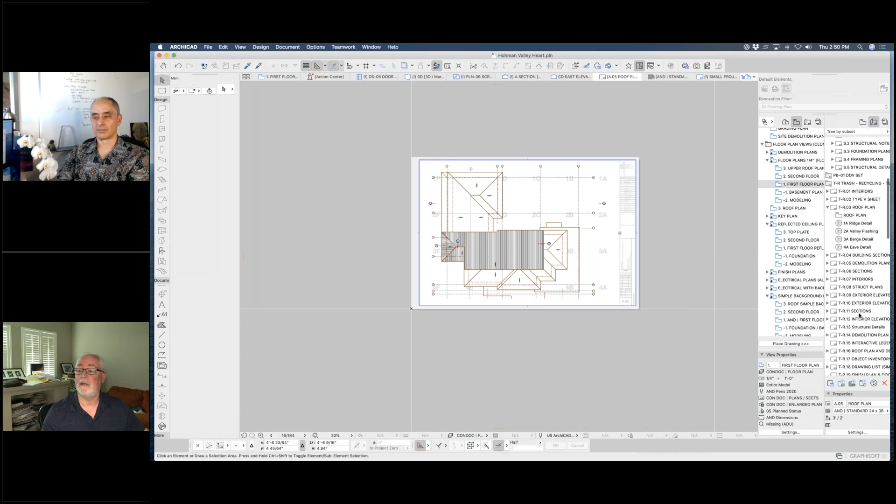As organized as I am, I still have all of these over here on the right that say TR. These are all recycling/trash. They're all layouts I've used and taken off. Sometimes I use it to store it.

That's the other thing I wanted to say. Make sure your sheet index is a sheet index that updates automatically off of one of the views. If I decide it's time to do an interior sheet and I drag it in here, now it's going to have to show here. And when I go to print it, it will, or it should now show. You have to rebuild it or refresh it. There's the interior. Okay.

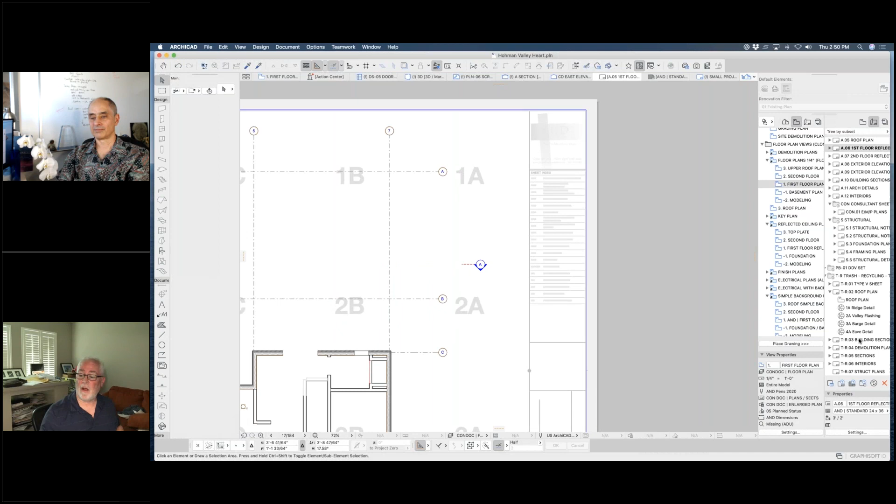The trash/recycling is really important as far as keeping things there that you aren't using yet. Because I'm going to print a sheet to send out, and rather than have 7 different layout books or subsets, I have one, and I'll drag things in and out of it as I use it. Because everything numbers automatically, it doesn't matter. The only place it gets in the way is if I'm referring to a sheet in a note, where I say per sheet A.07. I'd have to keep an eye on that, but keeping those separate.

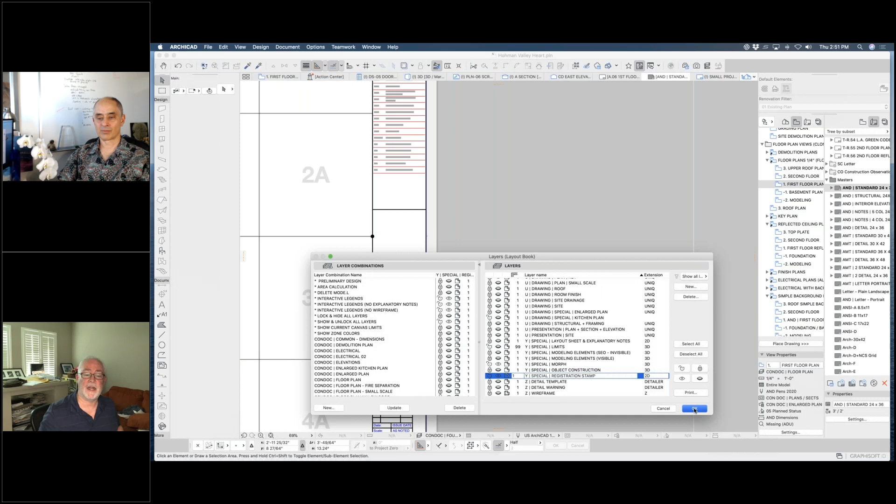And the other thing I keep on here, I'm sure other people do it too, it's not all that genius, but I just have to turn the layer on. I keep my stamp in this thing that Eric created called special registration stamp with my signature on it.

So I don't turn that on unless I'm sending them in, but I haven't used a real stamp on a set of drawings in years. I just send it in with these, which is great, it's just less time. The worst thing in the world when I was first starting out was having an apartment building with 150 sheets, and I had to stamp and sign every one to go to the city, and there were 3 sets. This certainly makes it easier.

Let's just back up for a second. So that sheet index and the trash recycling, I just want to make sure people who may be less familiar with that process understand. First of all, in a layout book, you have subsets. The subsets allow you to number different groups of drawings or to group them. So you have structural drawings perhaps, or the plans, the sections, the elevations in the 100 series, 200 series, etc. Now, even in a simple case like you're doing here for your main set of drawings, just sequential, so you don't need to have hierarchy.

It's like the consulting and structural, and you have their own. Structural are all S's. So the sheet index is a report of something in your project, and in this case, the index is reporting on layouts, and there's a criteria.

Can you just open up the criteria for that sheet index? I'm going to go to it right now. And while you do that, the criteria is basically going to say, what are we listing? Now, as what Van was mentioning was trash recycling, something that Scott came up with early on that we discussed and said, yeah, it makes perfect sense, is to create a subset that is specifically for things you're not using, that you might want to toss away or you might want to use, so you get them out of sight. So it's just a subset that you can drag layouts into, or layouts from there into active use.

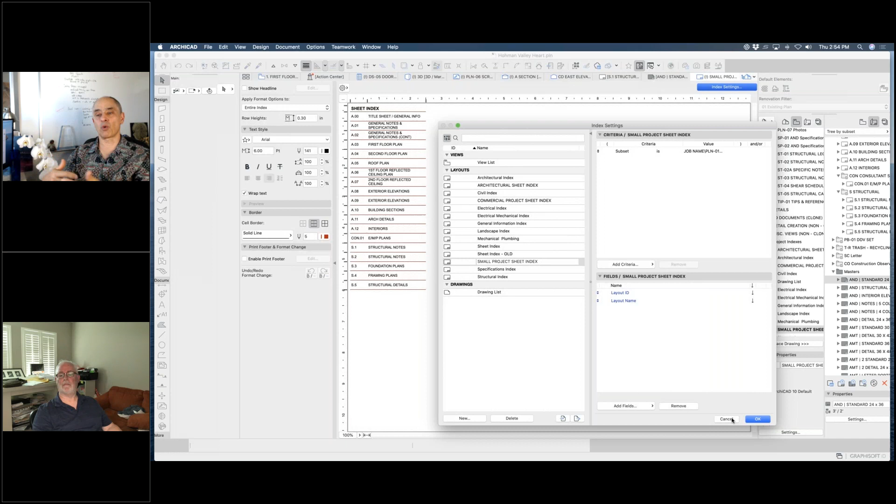And the sheet, the index settings, go to the index settings, Van. Yep. So it's basically saying the subset is whatever the job name. So in this case, it's listing only the sheets that are in that particular subset. This can be, we want these 6 subsets, but not these other 2, or it can be just a simple one. In this case, just it's within this main working subset.

So the trash recycling is simply a subset, a folder, so to speak, in the layout book that is designated for things that you're not using. Rather than delete them, just get them out of sight. And it's pulled out of the other subsets, so it's never going to try to publish it. So when I'm publishing, I select my subset that I want to publish and I publish it. Right, okay.

So let me bring up one more thing to show on this one. It's interesting, if that's okay.

When I talked about zip versus other ways of insulating and shear, the builder gave me the usual pushback of, is this the right one or not? Let me jump to the right one. Do you know what this costs? This is crazy, we have to do this, we have to do that.

I was able to take my wall section and create 2 blank wall sections that I copied and pasted it into.

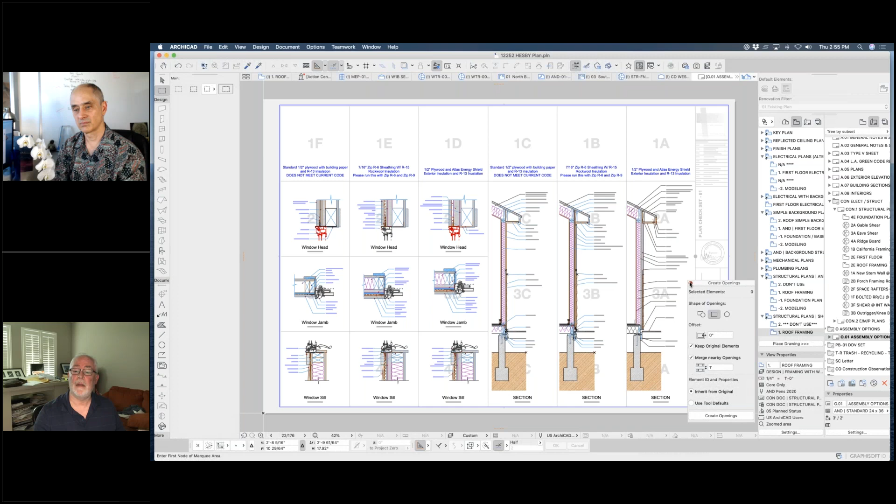And then in the layouts, here it is, assembly options. I sent him a single sheet. Let me close these so we can see. A single sheet, and at the top it says, this is this assembly, this is this assembly, this is the other one, and these are the window details for those same assemblies. Only one of these is a live section, right?

The others are drawings, where I took the live section and changed out the materials. Otherwise I was going to be changing the composites, which I did at first, and cutting new sections or showing the sections. The problem became that when you have different materials, this assembly has different materials than this assembly, and then all of a sudden your labels are changing.

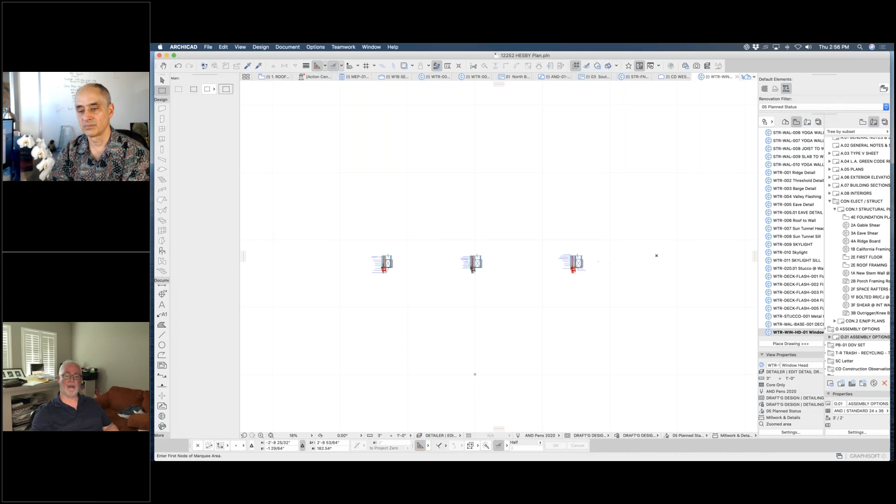But this allowed me to create a sheet where, if you look at these details, these are live details. Well, they're drawings, but my details usually have 3, 4, or 5 options on them, and I just crop to the one I want. So in this view, these 3 are all the same detail, just placed 3 times and slid over.

And it allows you to run through variations for people, to get bids, to get cost estimates, to even do this with design issues for clients. They like to see things on paper. I don't as much.

Okay, so I can understand the idea of having multiple details within the same detail viewpoint and just cropping to show one that's relevant for that particular context. But the 3 sections, you're representing 3 different wall options. And are these actually in the model anywhere and just not noted?

So I took my wall section that had the assembly I wanted, and I created 2 more identical sections that I hid, and then I converted those into drawings, and I just changed the assemblies. I just dragged.

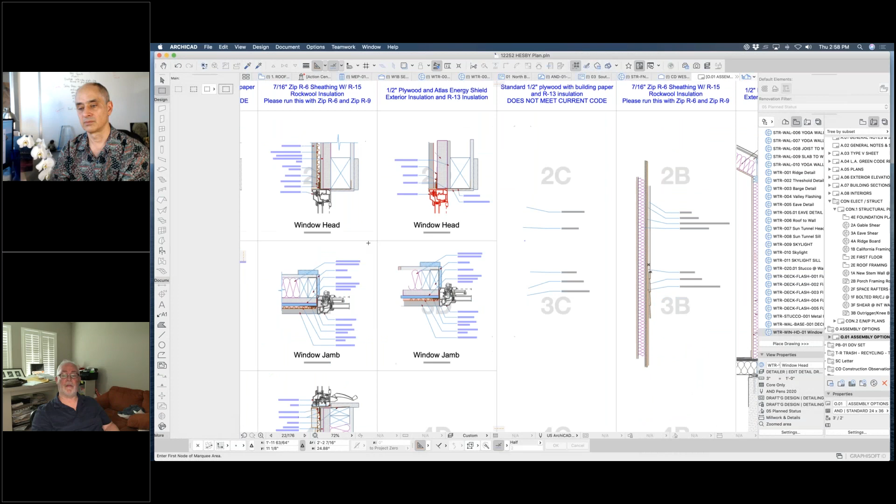In this assembly there's plywood over insulation, and in this assembly here, hang on, this one doesn't have it at all, so I took the insulation out. Some have the assembly over the insulation, some have it under. The labels are different too — one has R13 insulation, one has R15 rock wool insulation to get the right ratings. So it was easier for me to just modify the section in this case rather than model it 3 times.

Okay, so the model in this case where you're representing this wall section, has it not been updated? Oh, the real one — yeah, it's been updated. This is it right here. The other ones are drawings. Right, okay, the others are 2D.

So, but in the actual building, are those actually in use in some other walls, or are these just options? No, they're just options, so let me go to the floor plan. They're just options of this section right here, this wall section. So I just created 2 more that are on a hidden layer.

So this would basically be part of your design development where you're going to be choosing and making a decision on a final wall section? Yeah, now in most cases in design development, I might have actually just taken this one wall and broken it up and shown the 3, cutting the sections, because I wouldn't have had to do anything since I already have the wall assemblies.

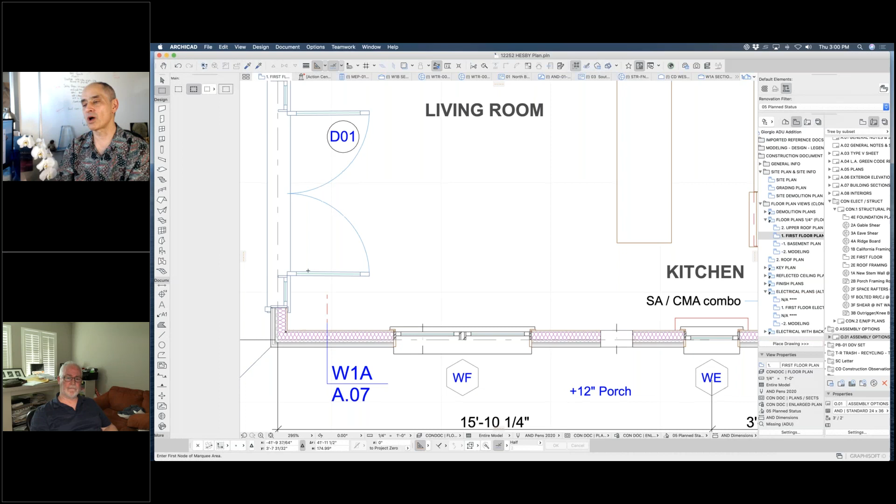Now, there's a question of how do you store your details? Say we have three questions here we'll finish up with, and we'll try to take the quick answers. How do you store your details? In other words, are they in your template and you bring them forward, frequently used details, or are they all cut live from your model? How do you import things like that? What about MEP? Do you model switches, lamps, etc., or are they just 2D symbols? And then a little bit about how you use zones.

So those are three. Okay, so first is the details. My details live in the template. I thought about having one PLN file that had all my details in it, and I refer to them. In the old days, I had a notebook with details. I would take them out, copy them onto sticky backs and stick them down. The problem is that when I make a change to a detail, it then changes every drawing that references that detail, every file that references that detail. So by keeping them in the template, when I pull the template up, every template has my most commonly used structural, they start with STR, and waterproofing, they start with WTR details. Can you just bring up a couple of them as you do this?

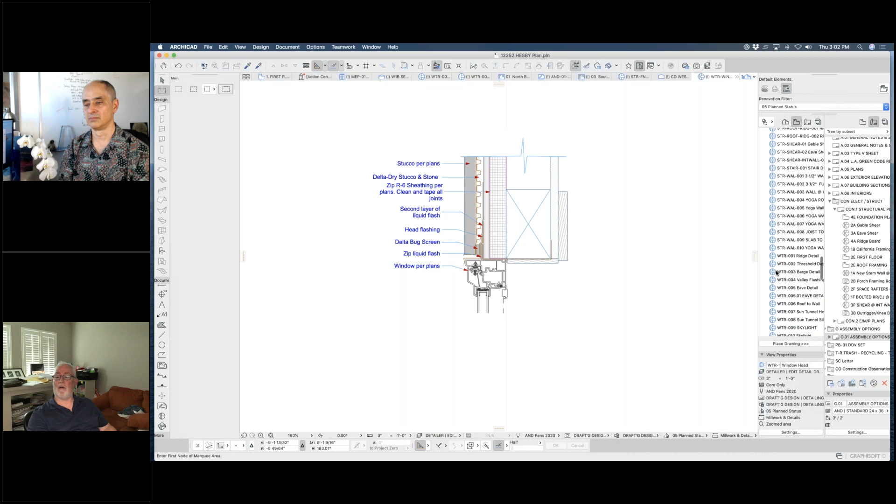Structurally, things I use all the time, shear details, ridge details. I have a ridge board detail, I have a ridge beam detail. I think I drew that in 2005. I have stem wall details that we use over and over again. And many of these are also living on the layout sheets to begin with. So my typical structural sheet will have those. In elevations, quite often my template has the detail bubbles already there. I just drag them into place.

So that's how I handle my details. I keep them as part of the template. And yes, I may make a change to one and have to remember to put it in the others. But the fact is that instead of opening a template file every time, I open my most recent file from that city with a new name, and I delete everything and start from that one. So I always have the newest stuff in every job that I start. That was the first question.

Then there was a question about zones, and what was the other one? About MEP, do you model switches, lamps, etc., or are they just 2D? Yes. I model switches, lamps, etc. I always was doing 2D. I got Eric's template and the room template for residential that has the kitchen, has the switches and outlets modeled. And I realized this is fantastic. When I go to my interior elevations, my outlets are there, my switches are there. In my 3D views, they see them.

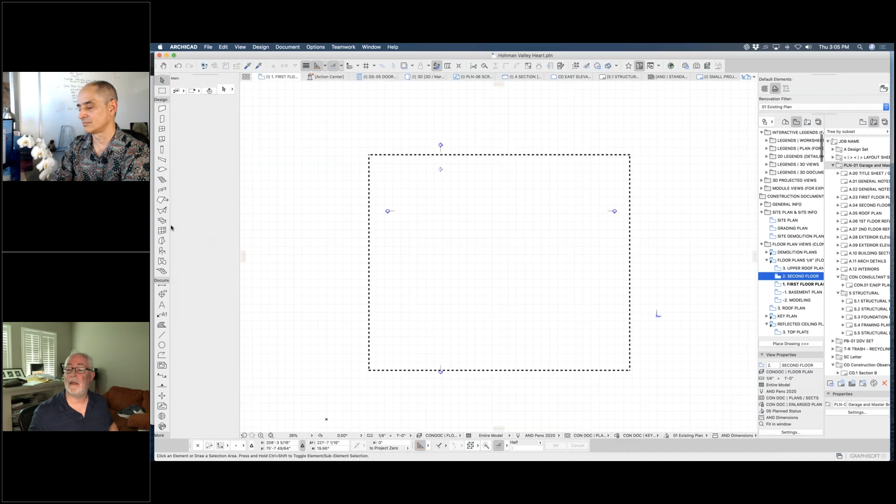Let's go to the other project real fast, the zone for a bedroom, floor plans. Okay, and again, I just use my typical zone. So if you go to the zone for the bedroom and open it up and go down to my classifications for room finish, there it is.

Its default is a wood base with a wood floor, 5/8 inch Type X drywall. Wainscoting always says see elevations. I don't usually have wainscoting, but if there were, it would be there. And that's different than the typical bathroom zone.

Which has ceramic tile on a mortar bed, 5/8 inch green board. So that's my zones I use for two things: one, naming my rooms, and two, my room finish schedules.

And do you have favorites then for the zones? Yes. Well, my zones, all of these zones here, living room, dining room, kitchen, bedroom, bathroom, closet, all have preset what I normally put in those rooms for a house. So when you just switch the zone category, that doesn't switch all those properties, so you must be using favorites to have all the properties associated? Yep, yep.

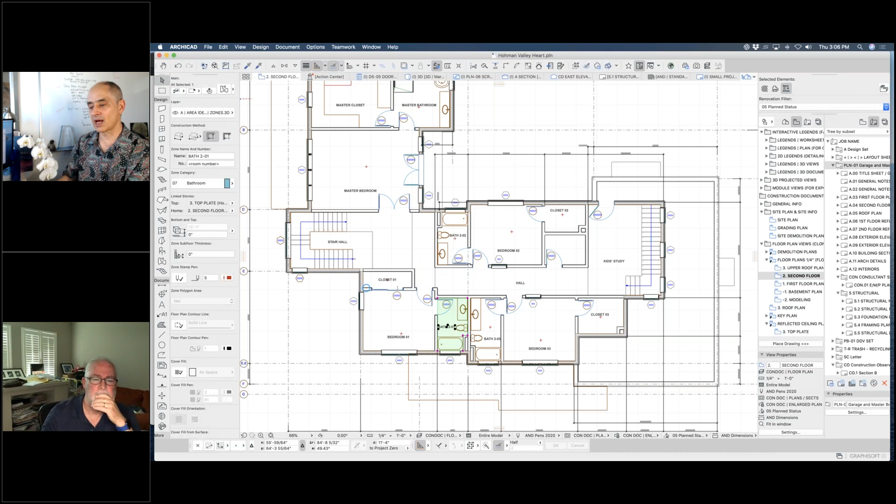Well, I think we've covered a lot. I know Rick asks, how will you get all those details into version 24? Well, details are 2D, they're just part of the project structure. And when you migrate your project or template from one version of ArchiCAD into the next, it'll generally all be there.

If you do want to start fresh, and certainly I provide a new version of MasterTemplate every year so that people can start fresh, then you have a choice. You can essentially get a new home and move all your furniture into it, which would be like copying all the contents of all the details, etc. Or you can say, all right, there's some new features in the template or in 24, and I'm going to take my project or template forward and just add those new features.

So now it's sort of a hybrid of a migrated project with some new paint, so to speak, as opposed to a new home where you're moving your furniture in. So there are two different ways. Every so often that new thing you're moving into is so fancy and so different, you do really have to start over. But yeah, that's exactly the way I do it.

So, well, Van and Scott, are you still on the line? Scott, I'm here. Thanks, okay. That was great. Thank you, Scott.

Yeah, so great to be in touch with both of you. Scott, I've had a little more contact with because I rely on him for some tech consulting when I'm upgrading MasterTemplate, and really appreciate the expertise that you bring to it. Van, this has been a treat to see your work and just to see the way you think, and I really appreciate your taking the time to help other ArchiCAD users by just sharing your work.